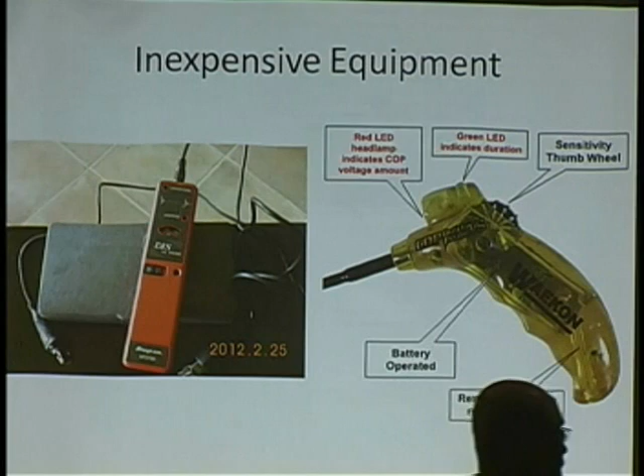Give me a reason why you should come out of that fuel delivery funnel. Once you, like, I start the car up on propane, all right, I drive it in, and there's no ignition issue in that, and there's no engine integrity issue in that, right? It's a fuel delivery problem. Why would I even think about looking at anything else? That's why I see a waste of time all the time. You've got to believe in yourself, is what it really comes down to. You've got to believe in your diagnostics.

All right, so we're going to walk through this now. The end result is that there's a lot of neat equipment out there. Has anybody seen this yet? This George, anybody's ever been George Mensah? George has been here a couple times. George and I do a lot of things together. George has designed a thing called a U-scope.

That is a problem cylinder, and the problem is external to the combustion chamber. Remember I said that.

Here's what we're going to get into. It's kind of weird that we have 3 seminars going today. While I was sitting in traffic on the New York freeway driving up here yesterday, with cars on fire and everything else, I was thinking about the 3 seminars. Does everybody realize how closely related they really are? What Jerry's going to do, what Judy's going to do, is talking about P0420s. And everything, P0420s come because of low catalyst efficiency. Well, everything I'm going to show you is all about how efficient the engine actually is.

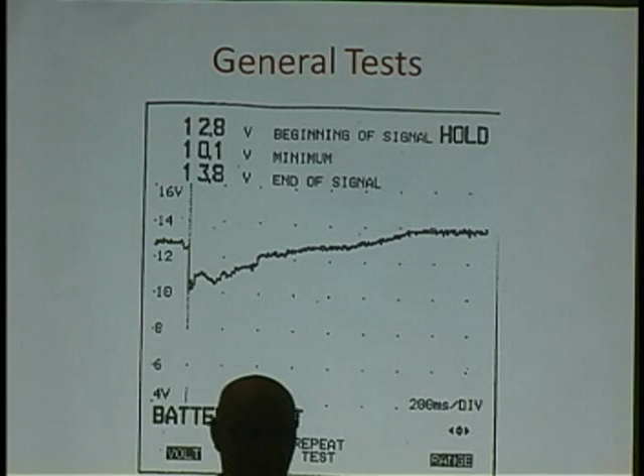Very simply, why do we have so many quote-unquote drivability problems now that I won't be talking about? It's because the federal government basically said get the car running better, get the car running better. And you ever hear that cliche, watch what you wish for? Well, what happens when the car runs better? CO2, carbon dioxide, right? So what do we have to do? We got a choice: either make the car run bad again, or turn the engine off. That's what Doc was talking about basically all morning. So these aren't really 3 separate things, they really are related to each other.

Anybody remember that picture there? Anybody ever have a thing called a Fluke 98? Here's another thing I just told you: when something is awesome, a lot of times we don't purchase it, and what happens, it goes away. I had a Fluke 97. Unless you did what I did every day and had a lab scope in my hand literally 8 hours a day, a Fluke 97 was pretty intimidating. With a nice scope it was still a little intimidating though. So if you don't know this, Corey Glassman from Fluke and George Mensah from AES got together and designed a thing called a Fluke 98.

And they made it a little more user-friendly. What you're looking at right now is a battery test. Geez, I thought this was a class on ignition patterns. Well, see, this is what it all comes back to. I'm sure nobody here ever did, but I lost my butt so many times by jumping right over the basics. And when I had 22 to 28 cars every day, I made sure that I have the basics. If my guy did not do this test, I would have been all over him.

You know how many times I flew? I became a troubleshooter for factories. I followed up behind the factory troubleshooters. You know how many times I flew across the United States and told somebody, you know what all those drivability problems are? You got a bad cell in a battery. So I always joke about this. I had some issues with my heart a couple of years ago, and I gave up my mobile diagnostic business and basically just do the seminars now. But the end result is, I said if I ever start my diagnostic business up again, I'm going to call it 'You Got to Be Effing Kidding Automotive,' because every time I told somebody what was wrong with a car, they said, you got to be effing kidding, no, a bad cell on a battery.

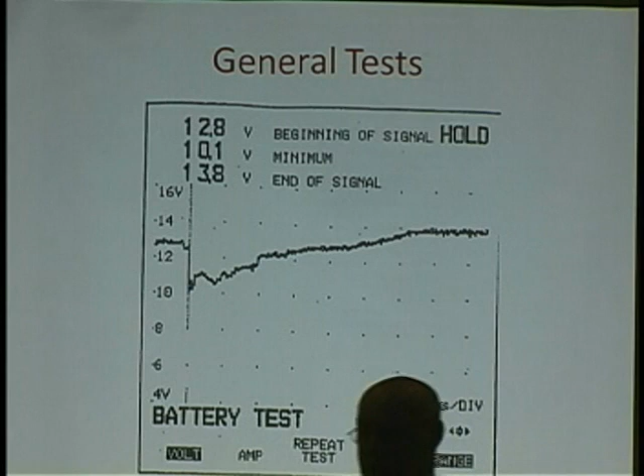Well, that's why I asked if anybody ever attended a McKenna seminar. McKenna told me all the time, if anybody ever walks in your shop and says when I put a VAT-40 on my car it starts to do this and that, they said, then use a VAT-40. But if they say when they're driving their car, when they start the car, why don't you use the things that are on that car? That was the number one thing he always taught me. He believed in equipment, but he also believed in use the car, use what's on that car.

But you're trying to find out what's happening to the battery voltage, so you crank it over and look what happens. This one went down to 10.1 volts. What it did is transfer that number right up there. Then when you crank the vehicle, this area right here is called CEMF, counter-electromotive force.

If I ask somebody to bring an engine here on a stand, and let's crank it over with a ratchet and socket. If you turn it over about 3 times, you do the first one, I'll do the second one. As you're coming around your third one, I'm going to grab the breaker bar and keep moving it. Don't I have an easier job than you? You had to get it going, right? That's CEMF. Every part of this waveform, if you look at it, it's telling you a story.

Can you say that acronym again? What is CEMF? Counter-electric motive force. And that happens a lot of times on a lot of things.

Okay, now hopefully somebody's sitting there thinking who cares, we can't buy this thing. I think it's pretty hysterical that a lot of the equipment I have, the same equipment you have, they tell you you can't do this with that, you can't do this with that. And then I said, thank God I had already been doing it - I would have known I couldn't do it, you know.

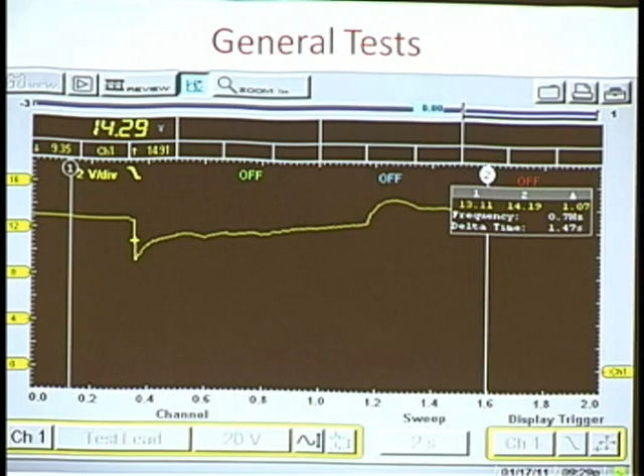I don't care what it is, but like that little thing George had, like $299 now. So my point is that you need to see the waveform and get used to what normal is. And then you're not going to be wasting any time. That's what it comes down to. Time's money.

Time's money. I hear people all the time, they tell you, you know what, boy, we fixed this vehicle, we fixed this vehicle. Okay, yeah - you start working on Monday, you finish on Thursday. That's called a hobby. It's not a business.

And everybody accuses me a lot of times of flat rating. They say I'm a flat rater. I'm not a flat rater. A flat rater is guessing. There's a way of doing intelligent, fast, accurate diagnostics, but you got to know what you're looking at. Does that all make sense?

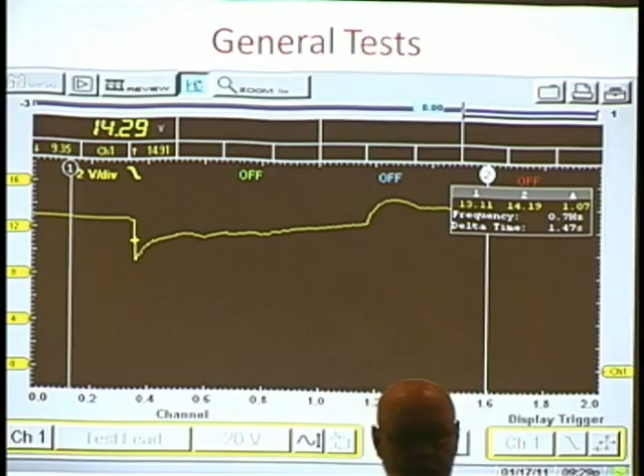So we're going to go through this now. Here's what I find all the time, I'd say just this week alone - from my experience, more than half of the drivability problems are not PCM or input sensor related. It's pretty funny. I don't know how long you've been in the business, but I started in my father's Flying A gas station working on Ford flathead V8s. I remember the first time a car came with valve covers, and I thought, wow, high tech valve covers. So I've been doing this a long, long, long time.

And what I found is very simply that we probably had no problems years ago, because if a car's got a computer in it, then the computer is always the problem, right? So we didn't have computers, so we must have never had any problems, right? Well, I think it's funny - we got computers on cars, and we had something to blame. One thing I stress in all my seminars is that computers can do things we can't, and we can do things a computer can't.

A computer - if I said, I want you to put a vacuum gauge on your engine and study that every second you're driving the car, I don't know about you, but I know I can't do that. But a computer can do that. But what a computer can't do is kick in common sense. Yeah, we have all these new things with adaptive memories and all that stuff, but the bottom line is that a computer has a program - it says, when you see this, do this. It didn't say, when you see this and it's a good signal. It just says, when you see this, do this.

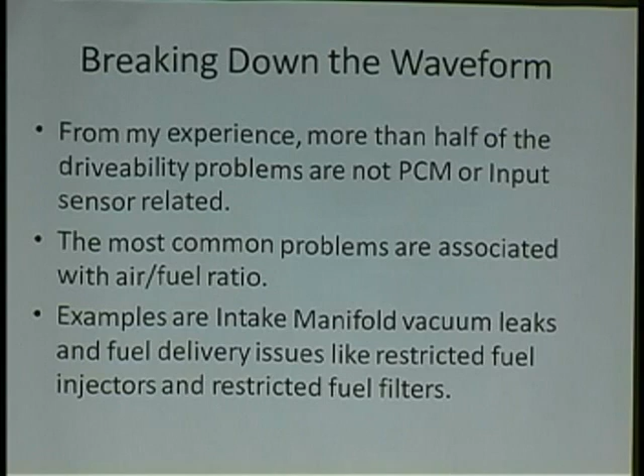Okay, the problem with these issues will affect other circuits like the ignition, which can cause partial or complete cylinder misfire. Unfortunately, we're led to believe ignition scopes are only good for finding open plug wires, fouled plugs, etc. I believe the root of the problem is that too much attention is given to firing KV and too little or no attention to the rest of the waveform.

I'd like to break down a waveform and give credit to the areas that help us actually understand a problem and its effect. Remember what I said - you really won't have to look at the waveform once I explain exactly what happens in there. I understand it's becoming increasingly difficult to get an ignition waveform due to the newer coil-on-plug systems.

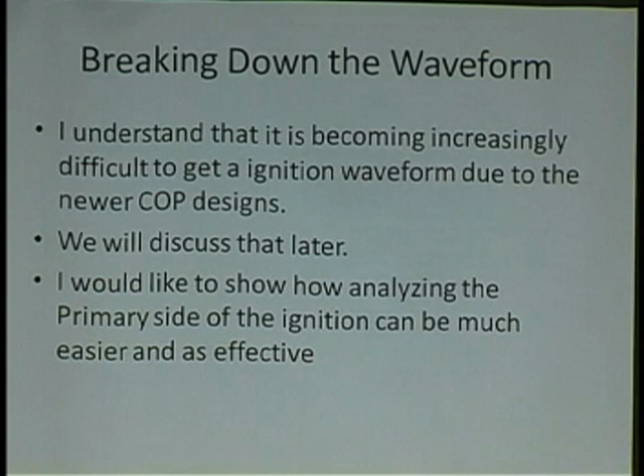We'll discuss that later. I like to show analyzing the primary side. All right, we get into this thing. I love this - you know, I say, look at this.

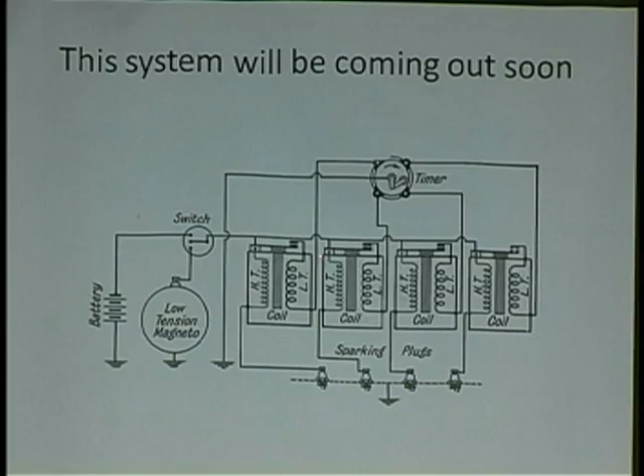I do a lot of work, a lot of consultant work for manufacturers. So next year, this is the system that's going to be coming out of a couple of manufacturers right here. What we have is something really weird: a primary and a secondary side of a coil. If you don't know the difference between the two, the one with fewer windings is the primary side, and then you have a secondary side.

Very simply, you've got battery voltage applied, and then a timer here that's going to time when you should fire it. And then we've got these new things called sparking plugs here. Very simply, it's going to be the newest, greatest thing out there, right? Well, that's actually a 1928 Model T.

So we can sit there and say how ignition systems are really, really different and stuff, but correct me if I'm wrong - did they really, really change?

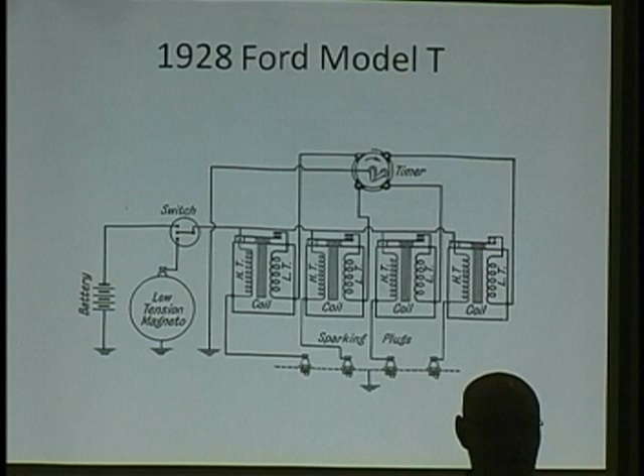If you don't know this, the ignition system you drove here on was actually designed in 1911. And I break them all down the same identical way. I don't know one out there that doesn't use primary, collapse the primary magnetic field, and produce secondary. When you break it down like that, I don't care what type of ignition system you have, they all basically do the same thing.

Now here's what I'm going to do. I'm going to break this thing down, and I'll tell you what I did here. We don't all have this stuff. I decided, like anything else I've ever done in my life, I always try to go for the hardest one. If I can explain the hardest one and get everybody to understand, it makes sense that the other one's going to be easier. So if you're wondering what I'm doing with this stupid thing here called D...

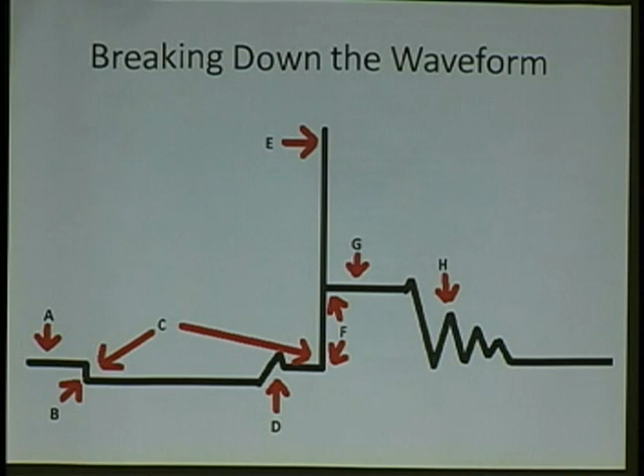Anybody remember current limiting, the HEI GMs and stuff? Well, if you don't know it, we still have that in a lot of cars today. But HEI GM really brought that to a head, though. So we're going to go over this, we're going to break it down section by section right here.

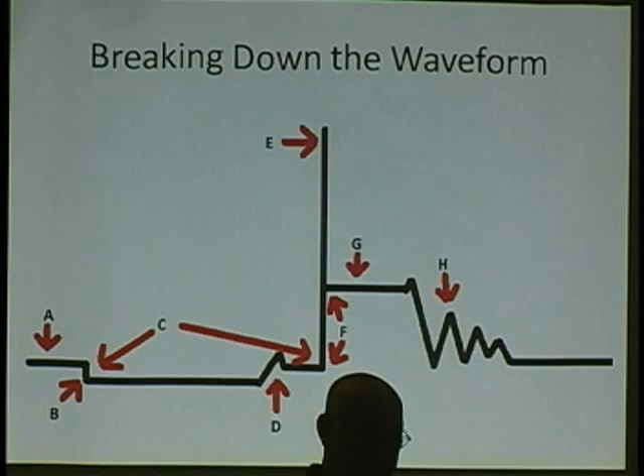First of all, here's my waveform. We're going to understand very simply that my dwell period begins right here. So 1.5 million years ago, my points would have closed there, and my points would open up here. When you drove here today, or yesterday, your module energized here, and your module de-energized here.

You know, it's pretty ironic, and I like to break things down to what they really are. We don't like voltage spikes on cars, right? We have clamping diodes and suppressing diodes all over the car. We don't like voltage spikes. This is the one voltage spike we want. That's really all it is. We're building a strong magnetic field, and we're collapsing it. When we collapse it, we have a spike.

Now remember what I'm going to tell you, it's very important for this part. The spark going across your spark plug does not light the air-fuel ratio, and everybody knows that already. You've all pulled plugs out soaked in wet fuel and had spark. It's the heat intensity of that spark that lights that air-fuel ratio. So we can have the spark.

So there's a real good test out there, I'm sure nobody here has ever done it, where you want to find out if a Phillips head screwdriver is a good conductor, right? Because that's the only reason I can think of for ever sticking a screwdriver in the end of a spark plug wire. I'm sure you're just trying to find out if the screwdriver is made out of good metal or something. Because that really tells you nothing other than something is happening on there, the engine's spinning. Other than that, if you're going to say, oh, my ignition system's okay...

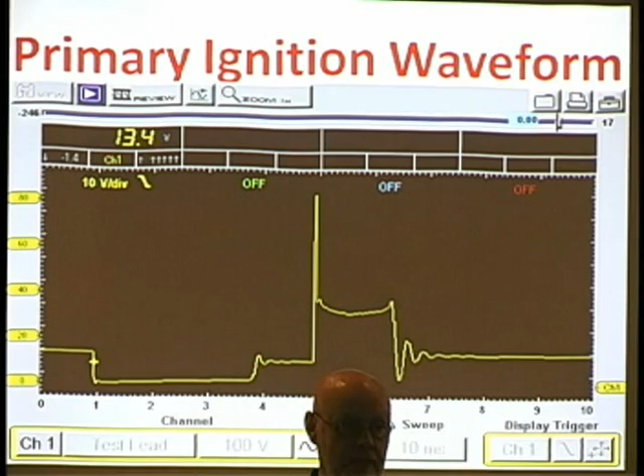So what I'm going to show you is that accurate. It can actually show you what cylinder and internal, external combustion chamber. There's a lot of things I've done in my life that work a lot of times, I'll say most of the times. This doesn't work most of the times - it has never failed me. Every time I've ever had to do this thing, I can always pinpoint internal, external combustion chamber, and obviously what cylinder it is.

So now what we're going to do is, I already ruined one myth, that we can't look at a vehicle, a COP coil. All right, there's a COP coil, and the end result is that you can look at it. Now I started off and talked about primary and secondary. There's the same cylinder right there, and I've got primary and secondary on top of each other.

I don't know about you, but I bet anything, if not right now, you will be able to pinpoint things, whether it be the primary or the secondary side. The neat part about it is, when you do see a problem with a primary, like I said, it's going to go into the secondary. Don't blame the secondary until you go look at it.

If I see a problem on my secondary side and I switch over to my primary and I see a beautiful primary, you know what? If it looks like a duck and walks like a duck, it's a duck - it's a secondary problem. But more than 50% of the time, I'm going to say more than 70% of the time, my secondary problems are in the primary.

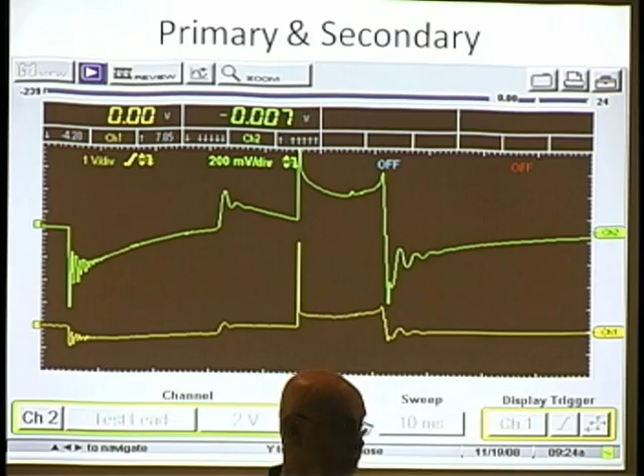And especially today, with voltage drops and all that stuff, Doc was talking about if you're comfortable with Ohm's law. I'll tell you right now, no offense, if you're not comfortable with Ohm's law, get comfortable with it. Because voltage drop testing, Ohm's law - when I started in the industry, we had a 6-volt battery, an AM radio, and a starter. That was the electronics part of the cars. Now, I had to keep on changing with the times and stay up on it. If you're not comfortable with Ohm's law, if you're not comfortable with voltage drop testing, get comfortable with it.

Now, that I talked about, me earning a living, I do not look at that yellow trace. There's no need whatsoever for me to look at that yellow trace.

What I actually have right here, and it's not just a coincidence, is a mini amp probe. I'm on the ground control of that coil right there with the mini amp probe. What a tough setup that is, two leads on your scope, and now you're actually seeing the work.

Now look what I did here purposely. Look at the top of the waveform, how it cuts off right there, okay? Look right here, what a coincidence, man. Right here, where this starts to go up, is even with that. And what is this down here? That's called current limited, which means you want to limit the amount of current because you're probably at low RPM right now, and you're probably going to burn your circuit up if you don't limit it.

What would happen when you take this car and increase your RPM? Picture this: take both ends of that line and pull it. What will happen is the hump will come out, because you don't want to limit the current anymore.

I don't know if it's the same in New York, but in Philadelphia there's 360 degrees in a circle at 1,000 RPM, and there's 360 degrees in a circle at 5,000 RPM. So you have to make and break the primary, right? And you have to build that strong magnetic field. That's why they put a lot of current in it, and I'll show you how they do that. But when you're at low RPM, you've got to be able to limit it.

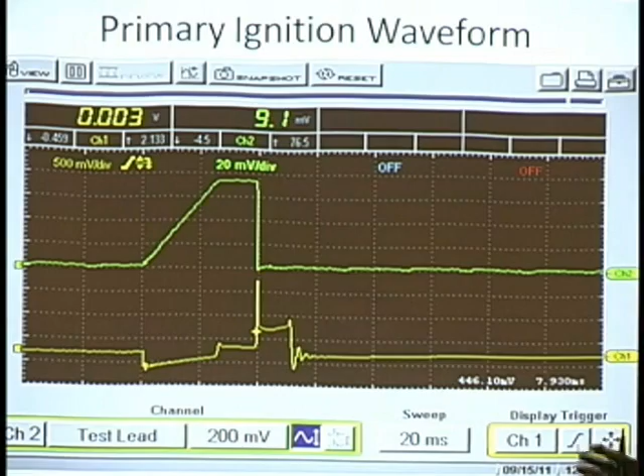That's what it comes down to. All right, now here's that U-scope again. Why would this system have both methods?

I'll tell you what's going to happen. That'll be your M3s, your M3 BMWs, and performance vehicles. They muck around with a lot of them. A high performance vehicle, they're still 360 degrees in a circle, so they have to do some stuff, and I'll talk about how they actually do that. For the most part, you're going to get one or the other, but every once in a while, if you go to look at a car, your luck and my luck, you're going to get one that has a combination of things.

I really don't care, as long as I understand it though. It's all about control, is what it's about. Now here's a perfect example I said to you. I'm on a $299 scope, all right, and you put an amp probe on it, or you can go voltage.

Now remember what I said also, look at that waveform. Look at the waveform here. See how it jumped out early right there? I guarantee you, by the time I'm done, you're going to realize what's going on there. I got a higher firing KV, and I also got a higher spark KV. Spark KV is extremely important, and that's where I'm going to lead this into. That's the part that nobody ever talked about.

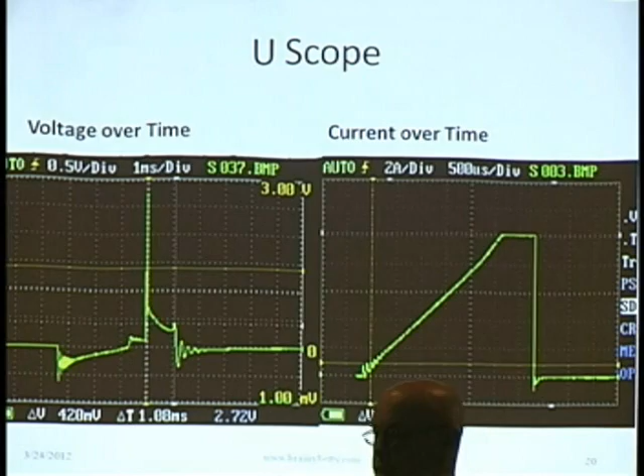Remember I told you when that guy was getting off the stage, and I was getting on the stage, that guy said two things up there. He said spark KV and imaginary line down the burn time. And nobody has ever taught about that before except McKenna. I've had people attend seminars, and they said, my God, it's so much easier now. It's like nobody ever really looked at it, no one ever talked about it. It's there, and it's pretty simple to see, right?

So the end result is, here's a couple of things I'm going to go over first. I talked about putting a puzzle together. And Doc was even talking about, is the problem really there, or is it because of something else? Hopefully everybody in this room realizes that the computer doesn't take a guess of when to operate the fuel injectors. It doesn't guess. It knows when it's got to do it, okay?

If you don't know, there's something called syncing. And what you're looking at on the screen right now is a V6 engine. It's a 3800 General Motors engine. I call this, because I'm not going to listen to everybody's names, since I work on all kinds of cars like most of you do, the alarm clock. The alarm clock is very simple.

Go out in the parking lot right now. Your computer isn't doing anything. It's not controlling anything. Why? Because there's no signal being sent into it. It's kind of like Doc was saying, you got to make sure the thing's getting a signal first.

So if you drive the alarm clock in, which in this case is the crank sensor on this V6 engine, if you take notice, I'm on one injector also. If you count there, you can see every sixth one of these, that same injector works again. It's not magic, right? Bottom line is almost every manufacturer is either going to use the rising edge or the falling edge of the waveform, and it's going to sync it.

Why is that really important? You know how many times you've had a car already and all of a sudden it just stumbles and stuff? Remember what I said: a computer can only do what it's told to do. So if the computer was told to hit that injector on a rising edge, what do you think would happen if that waveform dropped out for a second and came back again? That'd be another rising edge, wouldn't it?

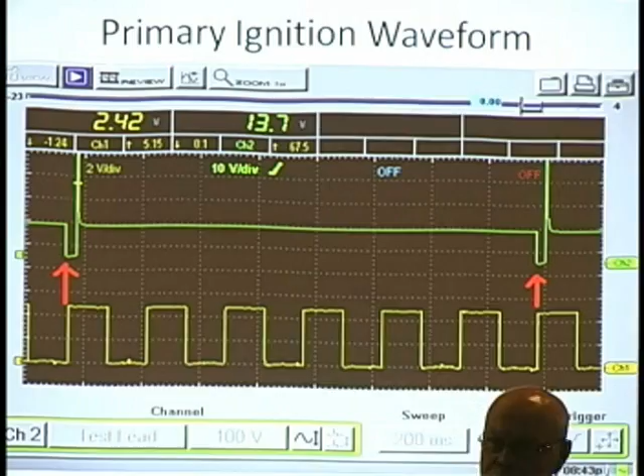Make sense? And then all of a sudden, look what I'm looking at. You're hitting the ignition, and it's going into 3 other circuits, actually. So what I want to do is, and this is the perfect way, we're going to stop for lunch.

I want everybody, if you get nothing else, I want to teach you this. There's not a car that you people have right now in a parking lot that we can't apply this to. I need to do some tests and drive down the funnel, okay? What I'm going to tell you right now is a perfect example that there's not a car that you drove here that this won't work on.

I'll use my own truck right now as an example. I have a COP ignition, a 6-cylinder with COP ignition. So I happen to have one A - A is where the primary receives its power from - but I have 6 B's, because my modules are inside a PCM, and I'm individually making a break in the path to ground. So I have 6 B's. I also have 6 C's because that's where the secondary begins at the end of each COP.

Now, if you have a vehicle like I'm going to show you in a minute, like ASE Composite Vehicle 1, which was a 4-cylinder distributor vehicle, then that's completely different. But the bottom line is A, B, C, D. And if you think about it, why did McKenna lay this out like this? Because why wouldn't you go and check A first?

Now, I'm not going to say you're always going to do that - it might be hard to do. But if I go and take my Phillips head screwdriver trick and I get nothing, well, I've got to go backwards at that point. So if you don't have A in the ignition system, you have no chance at all at B, C, and D, right?

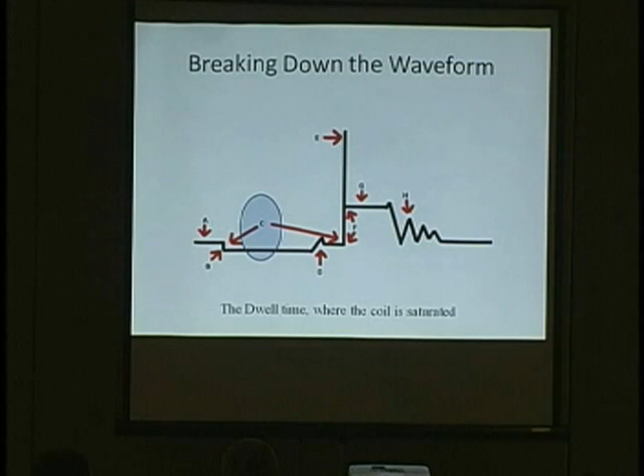Now, this is where we got to understand - I decided to put the one with the current limit in there. They might not have that. There might be a straight line, or it might be the current limit. But bottom line is, you're going to have one of those two, and I don't care which - when it pulls down, you want that to stay down.

When you have a current limit, it's going to be a very, very discrete-looking signal pulling up on an angle like that, right? It's not going to have noise in it - it's a discrete signal. But the dead giveaway, and I encourage everybody since it's actually easier to do, is you use something like that mini-amp probe, and you go around with it. Precisely when you see that current limiting on a mini-amp probe, you're going to see the current also hit that level at that point.

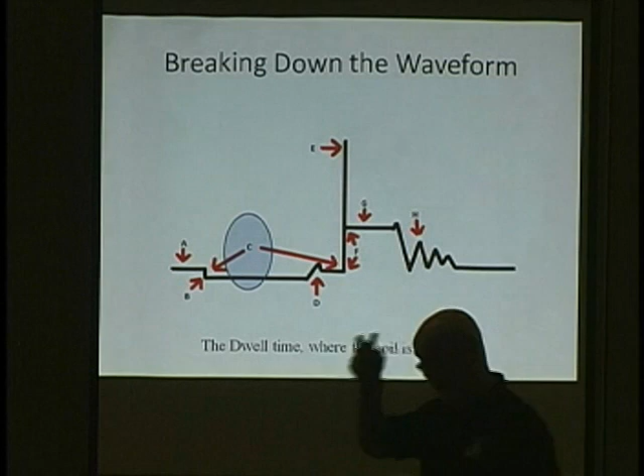A couple of people mentioned, just to clarify this for you - a lot of people say, well, I never heard of PDI and stuff. Let me tell you, PDI has been making mini-amp probes and amp probes longer than anybody I know other than Fluke, but they've been making them for every other company. So everybody has seen PDI equipment - guaranteed, you've all seen PDI equipment, just had somebody else's name on it. So the bottom line is PDI made a decision to start producing their own.

I have a $500 mini-amp probe, and if I put it up against a cheaper one and showed you two waveforms and asked which is better, I'll guarantee one will look better than my $500 probe. So why am I so stupid to buy the $500 one? Because when I started doing this, there was only one probe out there, I didn't have a choice. It's a really good probe and easy to hook up.

One other thing, so I don't have to answer everybody's question individually: that probe has banana jack ends, and there's another version with BNC ends. Don't get the BNC one, get the banana jack one. That way you can get a BNC-to-banana-jack adapter and use it on any piece of equipment. If you buy the BNC one, you're stuck with BNC - you can't adapt it the other way. You really don't want to go that direction. Go with the banana jack ends and convert over to BNC when needed.

Point D is the dwell limiter? Point C is the dwell, taken from the point. Here's another important thing: sometimes that's going to change, and sometimes it's not going to change.

Remember when I told you about the current, and showed you that straight line going up? If you get that, you're usually going to get a varying dwell. If you get a straight point coming down, that means you've got a ballast, and that won't change - the degrees will be the same all the time. The difference is that by increasing or decreasing voltage, you increase and decrease current at that point too.

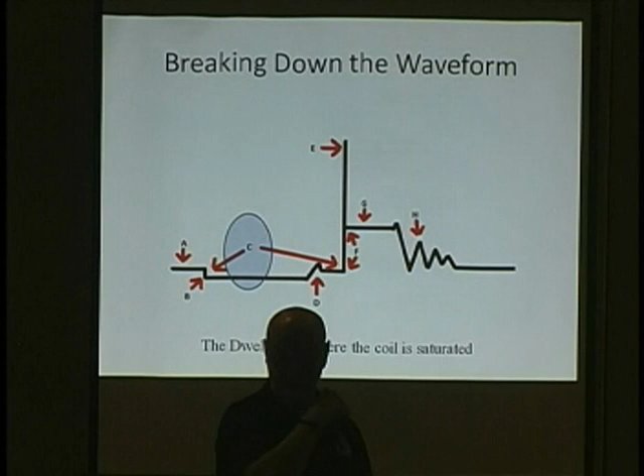As we get further into this, I'm going to start showing you what happens when you see a bad one, and we'll look at that. Okay, here's a perfect example.

There's current over time of a coil. If I take a line straight up here, this line and this line are eventually going to meet. I'll guarantee where they'll meet - at about 14 amps, because I've got about 1 ohm resistance and 14.7 volts, and that's Ohm's law. On this particular scope, I'm set up at 100 millivolts per amp, and I'm up to 200 millivolts per division. So there's 1, 2, 3, 4, and almost up to 5.

Some imported vehicles will run as high as about 9 amps, so I'm running about 9 amps right here. But I've got 1 ohm resistance - actually this one is 0.8 ohms resistance and 14.7 volts. That's why it goes so much higher. If you continue with that, that's what it will look like. You have to know the rest of the story, because very simply, they have to build it up fast, so they design it this way.

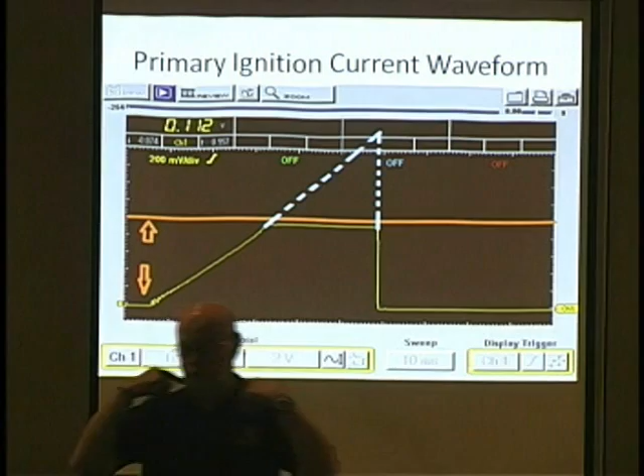Now, I'm sure everybody here, or somebody you know, has read a high-performance magazine saying here's what you've got to do - you want more power, get a high-performance ignition system. Besides the fact that they paint it yellow, blue, or pink, and tell you it comes with a neck brace bonus if you call within 3 minutes because it's got so much power - well, it's very cool, and you need to understand this.

What they actually do is, if you've got 1 ohm resistance in the primary side of the coil, they bring that down to like 0.7 ohms resistance. At 0.7 ohms resistance, everybody should be able to figure out what's going to happen - the angle of the ramp is going to move this way.

Because it's going to go up much faster - if you put 0.7 ohms resistance, instead of 14 amps, you're going to get to 17, 18, 19 amps at that point. So what happens is you get to the same current you need, that same 5 or 6 amps again, but you're going to get it much faster. That's quote-unquote performance.

I don't want to make this a performance class, but the reason why I point that out - 3 guesses what happens when you start getting voltage drop in a circuit, when you don't get the right amount of voltage. Remember I said current follows voltage. So now all of a sudden you're going to take notice the angle of the ramp's going to go this way. So now I'm still going to get there and say, no, you're wrong, because I measured the current here with my amp meter, and I'm still getting the same amount of current.

Well, you might be getting the same amount of current, but what would happen if this current here went up to right about here? How long do you have it? That's a weak current. And that's the vehicle - when you get into a demand situation, you see it fall on its face.

Now a lot of people say, well, how do we know which is which? Like everything else almost you ever do with a scope, comparison read it. So what do I have right now? I got 1 coil operating, okay?

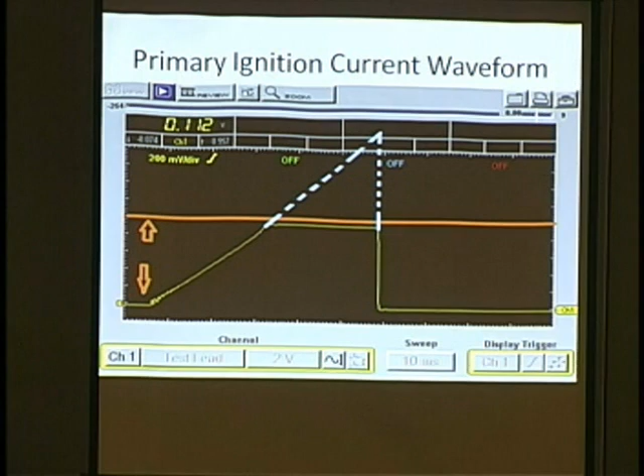But the neat part about current is it's on the power and the ground side. So when you go to the power feed of a coil pack, or the power feed of 6 COPs, you can see all of them. All you got to do is change your time base and put them on, and they get just like an old parade pattern - you got them all lined up. Now you're doing a perfect comparison read.

I'll tell you, it's not anywhere near as difficult as people think. You just got to get started looking at good ones, that's all.

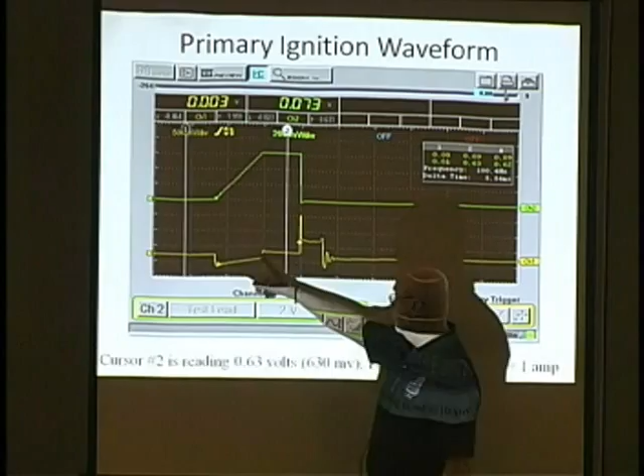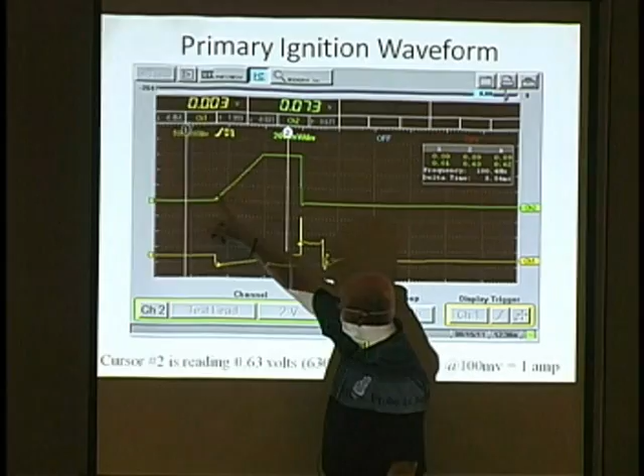Now, if I were to hit the throttle on this vehicle, what's going to happen is the dwell is going to increase, right? And what's going to happen here is that this angle is going to come over toward here. I'm going to lose the current limiter. The further this goes, this is going to move over also, and then it's all going to move together.

So the reason why is that's about 6 degrees at idle of dwell right there. You go to get about 20 degrees of dwell at 2,000 RPM. When you start raising the RPM, you still have the same amount of degrees to do the job in. So now you don't want to limit current anymore.

Now, little thing to throw in, you might want to put this down. It's a very common thing I see all the time - when you buy, and I'm sure there's some quality, quote-unquote, white box stuff out there - almost every time I look at a vehicle that was bad, didn't run, and the guy puts a new module in, now it runs, but it just doesn't seem to have the same amount of power. I can't begin to tell you how many times I find a white box module has a fixed dwell on it.

So these GM ones, for instance, they were 6 degrees of dwell at idle, and up to 20 degrees dwell at 2,000 RPM. After that, they didn't extend anymore. I can't begin to tell you how many Corvettes and stuff I looked at with 13 degrees dwell no matter what. And what it was, it ran - it didn't run before, it runs now, but it's not going to run with the same quality.

So you want to get used to checking, is this a dwell that varies, or do I have a fixed dwell in it? And you'll find that's how they save money - that's the most expensive part of that module to build in. So they can get the car to run, but now we're sitting there trying to, I like to say, pull your hair out, but I don't do that.

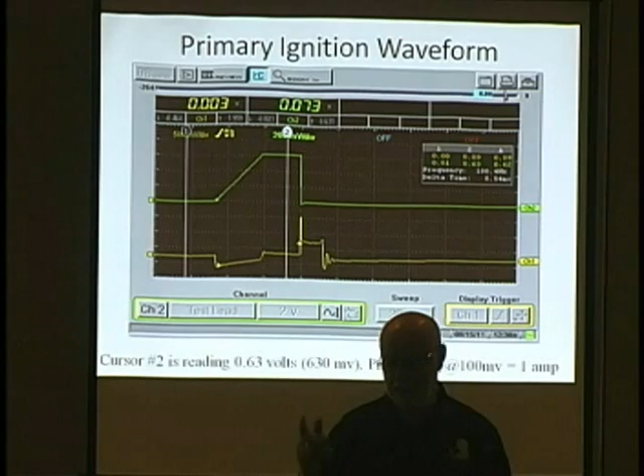The end result is you're saying, why isn't it run like it's supposed to? Now what I'm doing is I'm moving this, I want to show you time-wise. You can see how they line up perfect, right? Look right here, and look where it starts, and look where it starts there. I like to bring cursors up just for that reason. It's not me showing you, it's happening right there also, that you were just talking about a few seconds ago.

How did you correct that problem? With that 13 degrees and stuff, a quality module. Yeah, there's nothing I can do about that. Or, you know what I do? I've done it, I'm going to tell you more than not. At least I told the shop or the owner of the vehicle, here's what it is, and you make the decision. You want to leave your $35 module in there, you want to put a $95 module in there. The car's still going to run, but the reason why it doesn't have the power, I've given the answer.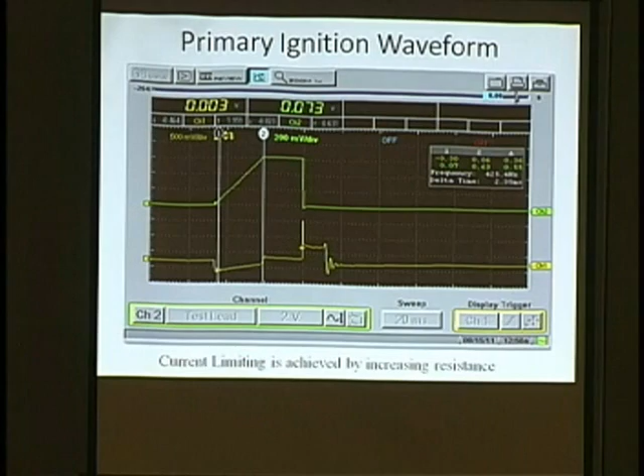I'll tell you right now, a lot of cars, 20-25% of the cars that I pinpoint the problem, it doesn't get fixed. They at least know what it is now. So I'm very, very careful about this whole thing I'm doing. I can't say I think maybe perhaps it's here, this is it - I have to be able to know what good is in order to say that though. Most of the time it's like generic versus OEM, right? Yeah, and it's not all - somebody's aftermarket stuff is just as good, if not better. But when there's a reason that something is $95 and something's $30, it's not that the printing on the box costs $65.

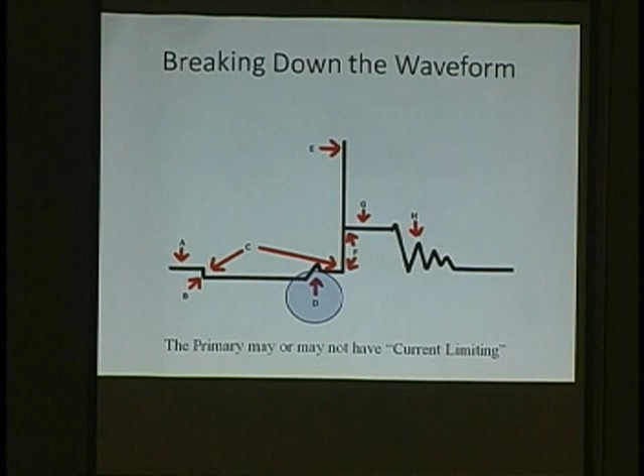So here's what I talk about, current limiting. A lot of people think that went away with the GM HEI. It didn't go away - a lot of cars are current limited. And how they show it to you in the waveform is what you want to get used to.

Okay, so here we go now. My one piece of rope - this is what I really want to accomplish this afternoon. Everybody talks about the firing kV and the burn time. I talked about it first thing, that one piece of rope, all right? If it's harder to fire the cylinder, your firing kV is going to increase, okay?

What I do all the time with my students - they love to see me do this because they're hoping I'm going to have a heart attack and fall over. I've got a tile floor in my classroom, and I say, guys, here's what I'm going to do. I'm 150 years old, but I'm going to see if I can broad jump 2 tiles. And the end result is they go, yeah, go for it Miss Morton, I hope you fall over, we get the rest of the day off. Well, I could probably still do it - I don't do it, but I can probably still do that, right? And I say, okay, what do you think, how about 5?

5 times, you got to die. I say to them, seriously, and I say to you, if I was able to broad jump 2 tiles, if I've got a ghost of a chance whatsoever of jumping 5 tiles, what do you think I'm going to have to do? I'm going to go take a run and start, right? I'm going to back up, okay? And if I happen to make that, how about 12? I'd probably have to go back to Route 84 or something, take a run and start. Maybe I'll go to the top of that mountain up there and come running down - I have to take a bigger run and start.

That's why I really don't like to do what I have on the board right now. What I like to do all the time when I talk about this, I want you to see me drawing it. You know why? Because I'm going to put a line up and a line down. So anytime the ignition system feels that it's going to be hard to jump the gap of the spark plug, this is G right here, this is the burn time. If it feels it needs a lot more energy to do that, what it's going to do is take a run and start. That's why it's important you understand that's not one line - that's a line up and a line down.

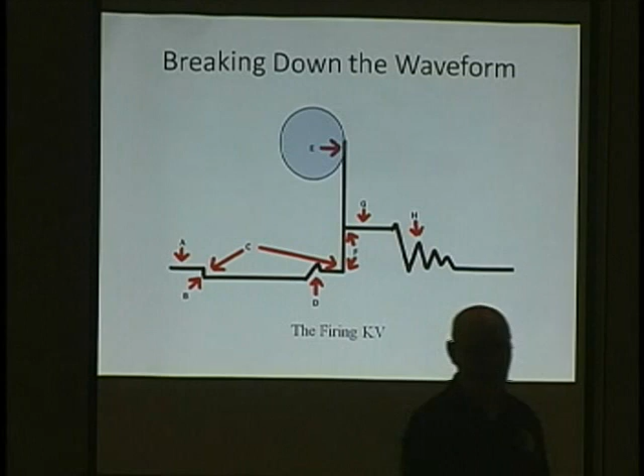But if I add the oxygen, you wouldn't stick your finger in that flame. So what happens when I make this flame leaner and leaner? Now I can start cutting the legs off the chair, right? Transfer that information you already have in your head into the combustion chamber now. Make sense? People always think when it's rich, that's really hot - no, it's not. Go put your torch on acetylene only and try to cut a leg on your chair - you'll be there until the next big event, maybe get a bubble of paint. Lean causes heat. So that's what's happening in these combustion chambers now.

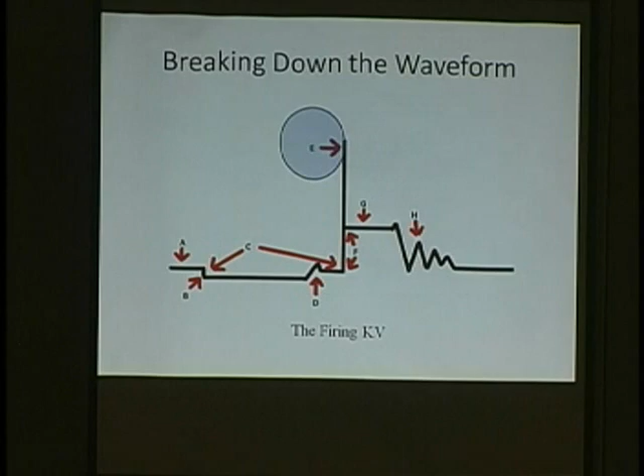Here's that rope. And by the way, you'll see this in a lot of books - this is McKenna. McKenna's the one who started this stuff. He talks about it - I swear he could walk around on Sunday afternoon coming out of church and he had this piece of rope on him at all times, always telling people about this stuff.

Remember this: don't worry about the firing KV, worry about the burn time. One more time, it's very important - 1.0 to 1.5 milliseconds. The newer the car, 1.0 to 1.2, because you know the firing KV is going to go higher now since it's running leaner. You don't want more than 1.5 and you don't want under 1.0.

All right, now let's get into the meat of this thing. That one piece of rope I just showed, see the 2 circles I have there? There it is right there. And I'll tell you what I don't like, even though I just did it myself - you saw my waveform, how beautiful that looked? Everybody says the same thing, and I'm going to say it also: you want to really study details in a waveform, you want to see nice 90-degree turns and all that stuff. No, you don't really want to. See this right here at the end? This is the end of the rope, here's the part of the rope.

See how that goes up right there? I can't tell you how many thousands of hours I've seen wasted with people going, 'what's that about? What's that about?' Everything I'm going to show you now, remember this: voltage over time. From bottom to top is voltage, and left to right is time. That's important because if I've got a hump right there, I said a leaner fuel ratio is harder to fire - you need higher voltage, right? Isn't most of the fuel, hopefully, burnt by the time you get to the end?

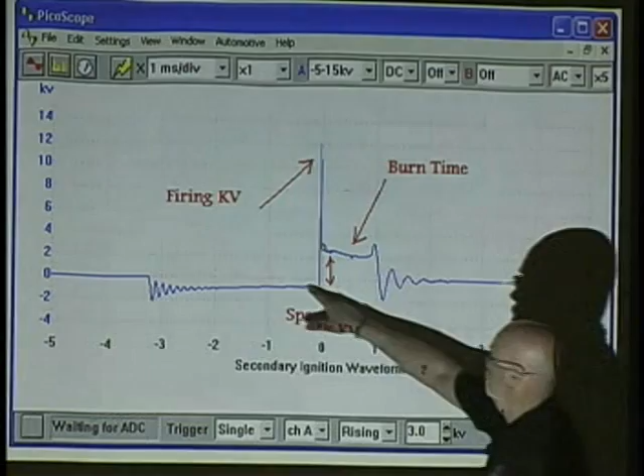We used to use an old test that we could measure that. There's the ionization voltage, but then there's the actual sustained voltage. It's usually, and everybody describes it different, that's why I asked that. Almost everybody describes it differently, but honestly I don't even care about description. It's such a powerful thing, it's unbelievable. The Spark KV is the amount of voltage between the very bottom right here, and where it jumps out at.

And you know darn well, everybody in this room, the amount of times you've heard anything about that, you could put in a thimble. This is the single biggest thing I get feedback from people who attend the seminar about. They have no idea how powerful that was. I've got literally thousands of emails saying, my God man, I'm cutting my time way down on this now. And I think that's kind of funny because it's not really that new. But it's something that now I realize I had the privilege of studying under somebody who really knew what he was talking about, and he showed me something.

Now everybody remember, as I go through this, no matter what the reason is, firing kV is going to go up because it's harder to fire the cylinder, okay? But the spark kV, that's the one you're going to learn to really, really watch. If the spark kV changes or doesn't change, that's a dead giveaway of where the problem is actually at - what that voltage actually is for the ignition system, what it needs to maintain that burn across the plug. If it turns out that the firing kV goes so high, it builds up energy so high, it has the ability, enough strength at that point to jump out early, if it's high resistance external combustion chamber.

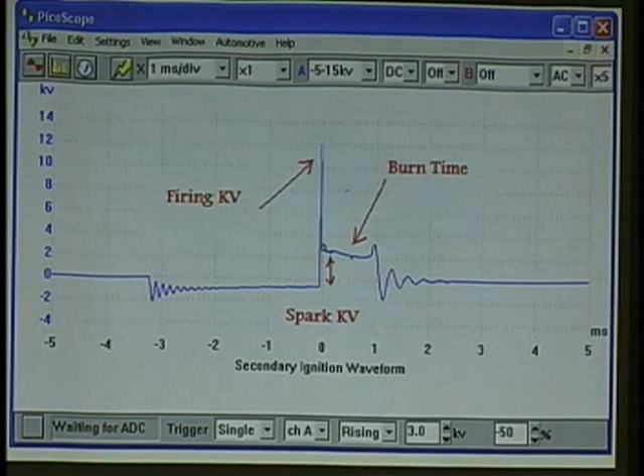Now watch. First of all, I like to tell you, again, I said this earlier and I'll say it one more time - I'm cheap. I must be, because I don't throw things out.

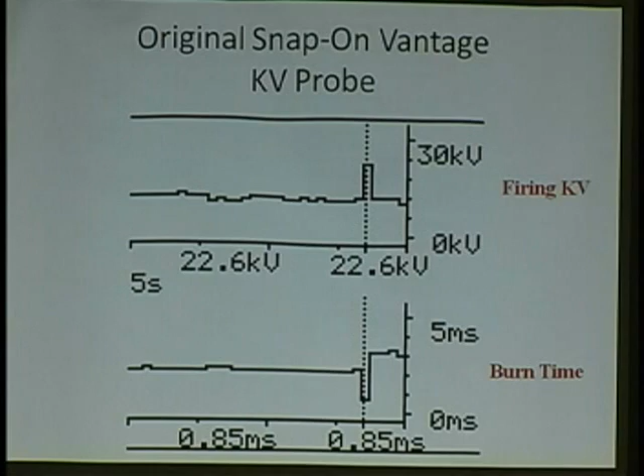Here's something you got to think about. Anybody give me a waste spark? Waste spark is going to fire once on compression, the other one on exhaust, right? You've been talking about it a little at lunch. What's normal firing voltage, what's the firing kV when it's on the exhaust? Any idea? Lower kV, okay, but how much? What's low? 10? 1,000? Maybe 12.

Everybody listen very carefully, this is cool and it's going to help you with a lot of different things. There's a thing called law of ionization. I didn't make it up, it was here before we got here. Look at this very carefully: it takes approximately 80 volts to push energy through 1,000th of a gap at sea level.

What's a plug gap usually gapped at? 40, right? 80 times 40 is 3,200. So it takes about 3,000 volts to fire an empty hole. You know how many times I've seen ignition systems using 6,000, 7,000 volts to fire the waste spark?

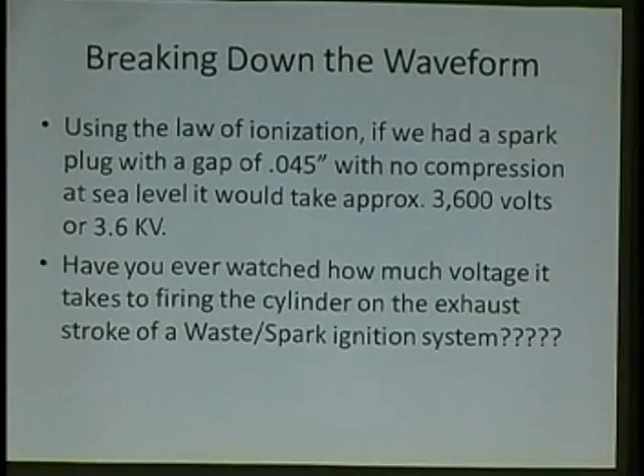You got to know what it's from, though. So very simple: if you take a 45 thousandths gap, and it's not under compression, and work at that law of ionization, that comes out to 3,600 volts. You don't want to see 5,000 or 6,000 when you're on exhaust stroke. So now you can see how you're getting that 12 or 20 kV because you're under compression at that point.

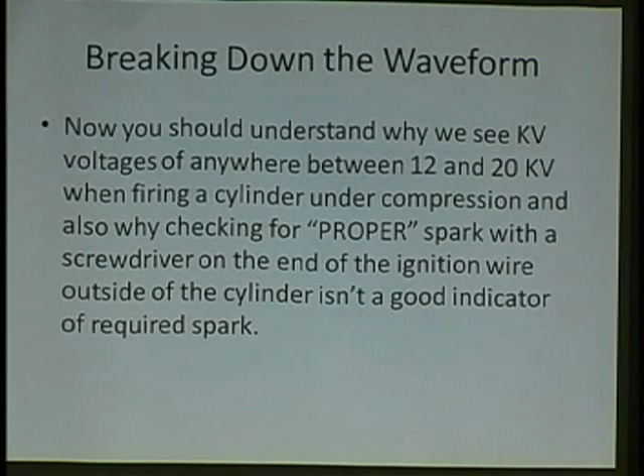Again, I don't worry about the firing kV, I worry about that burn time though. Okay, here's a perfect example, another piece of equipment. It's in the back of everybody's shop, facing the wall. It holds at least 5 coffee cups, and no one ever uses it because it's an old piece of junk. That's a Snap-on counselor.

If anybody in this room was taught secondary analyzing, I'm positive whoever taught you taught you a thing called a raster display pattern, or a parade pattern. They taught you one of them. Hardly anybody ever really learns both. We want to learn both because one is fantastic to look at for voltage things, and one's fantastic for time things.

This is one of my students' vehicles, his mom's vehicle. He's got a burn exhaust valve, and the valve is actually in a couple of training magazines now - there's a picture of it because it looks like someone took a torch and cut part of the seat right out of the thing. Very simply, I said to my students, look what we got going there. We did a cylinder leak down test - you can see the problem, air coming out the exhaust and everything else.

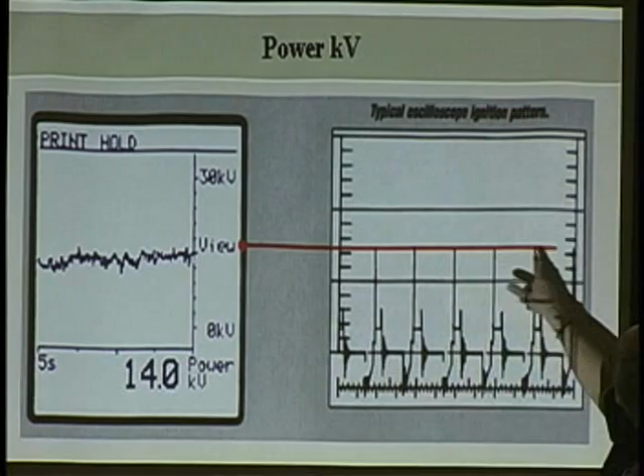See this line here? It's basically like if I say to somebody, draw a dot here, a dot here, a dot there, and connect the dots. That's what you have there. So when Snap-on guys go out and say, oh, you're going to see a secondary pattern here, and they look and get that line, they say no, it's not a secondary pattern. But look at it, it's pretty darn good for a fast, easy hookup. If I saw that thing and it looked like an O2 sensor, we'd have a major problem, right?

It's okay to get that kind of noise in it. Overall, they're basically okay. You know what I would now know about this particular vehicle? Whatever problem I have, it's not ignition. Now I'm going to take another one.

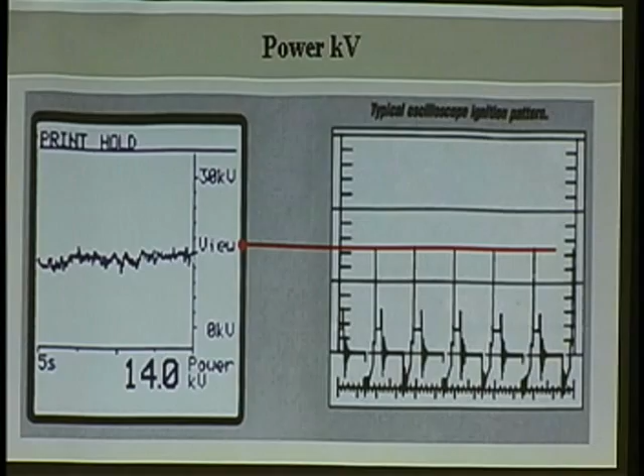I'm going to look at the other ones also, and you can look at the burn, the burn KV, or burn time, and spark KV. Now look here, I'm on a secondary pattern here, basically the same thing I just showed. What I'm doing is showing an actual one here, and again, I'm on a primary.

I love everybody, but you can't look at primary and get a good reading. Thank God I was doing it for a long time before somebody told me I couldn't do that. I mean look at it, that's a beautiful reading. What I now know about this particular car, whatever it is, here's my dwell, here's my

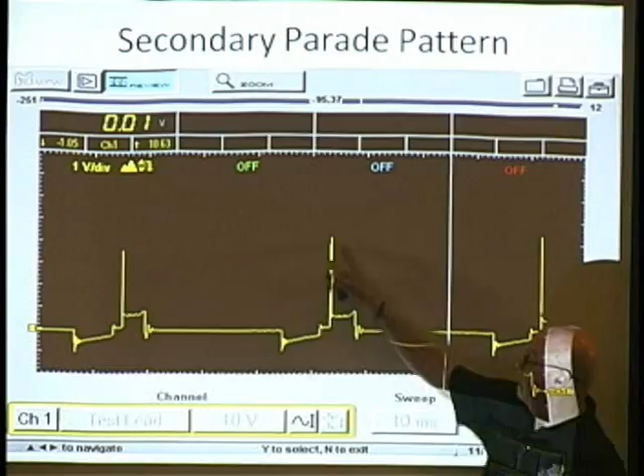module energizing, here's my current ramping, here's my firing KV, here's my burn time. I'm slanted up a little bit right here.

I never got this. What is this here? Wait, what's that for? It's leftover energy being dissipated back in. Leftover energy? What, the thing? Ah man, look at that. The ignition system is stupid, man. It built more than needed. Isn't that dumb?

Please, please, please everybody, listen to me. This is something hard, anybody knows anything about this, I'm telling you, start looking at this. This is very, very, very important. That's called condenser co-oscillation. First of all, it should be called capacitor co-oscillation today, but it's called condenser co-oscillation.

If I put a potato in a microwave for 10 minutes, and I take it out and throw it back there to Pete, and Pete's going, oh man it's hot, he's going to throw it back at me. And I'm going to throw it back at Pete. I don't want to hold on to it, he doesn't want to hold on to it, so we're going to go back and forth. Is it going to get hotter? It's going to get cooler, isn't it?

Okay, here's the deal. Years ago, they used to build about 3,000 volts extra on every firing. So if the ignition system felt it needed 12,000 volts to fire, it would build 15. If it thought it needed 15, it built 18. It builds about 3,000 volts left over.

Not because it's stupid. What happens is, when the dwell completes, it starts to build. And it doesn't know that you might be pulling up behind somebody, going a little bit slower, and maybe you might want to pass that person. And when I do this, pass somebody, am I going to go lean or rich?

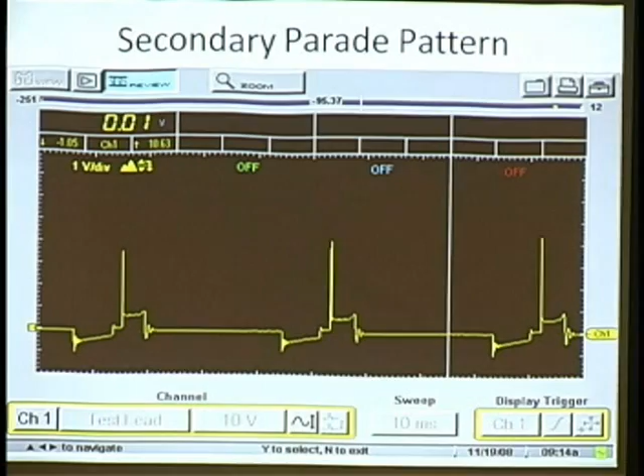And this is a perfect example of that combination. So you're looking here trying to get the whole waveform and figure out the waveform itself, okay? So here's that spark KV - this is that cheap piece of equipment a lot of you already have, and look what it had on it already: 5 kV, and this one here is about 1.5 K. So what I told you is that reading between the low line going up and the 90-degree turn, that's spark KV, right? Watch what happens here.

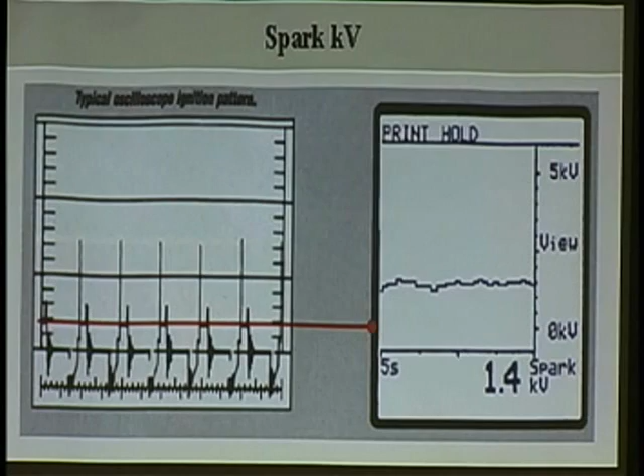Now I'm going to show you what happens - that's good. Now look what happens when a problem pops up, all right? Look at all my babbling so far today. That's second from the top cylinder. Which one do you think's got the highest firing kV? That one, right? Because look at the burn time. Okay, so what did I do there?

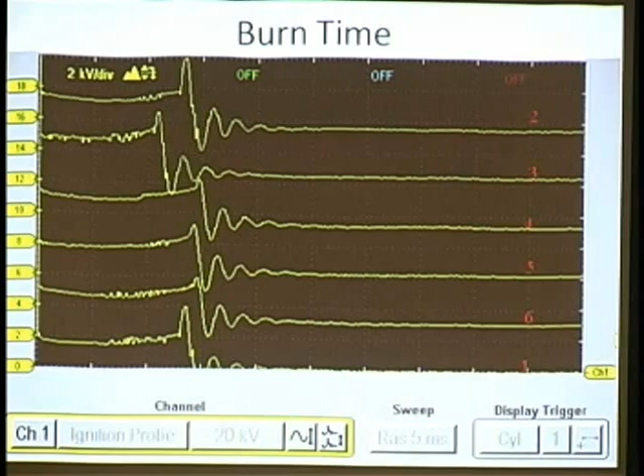Well, very simple what I did - I increased the spark plug gap by 20 thousandths on that plug. What I'm trying to do is back up what I'm telling you. Here's what happens: so if I didn't do it, and you got a worn plug, or anything else under the circumstance, it's going to do the same thing.

Now here's the most powerful part. This is the thing the guy said when he was getting off the stage and I was walking on - he talked about an imaginary line down the middle of the burn time. I want everybody to do this. Now here's a perfect example.

That unit I talked about on an MT2400, you know, you get good, and like you said, 'oh, is it this or is that?' I'm gonna get some good ideas. But I can see the actual waveform, even on the primary. Put an imaginary line down the center of the burn time.

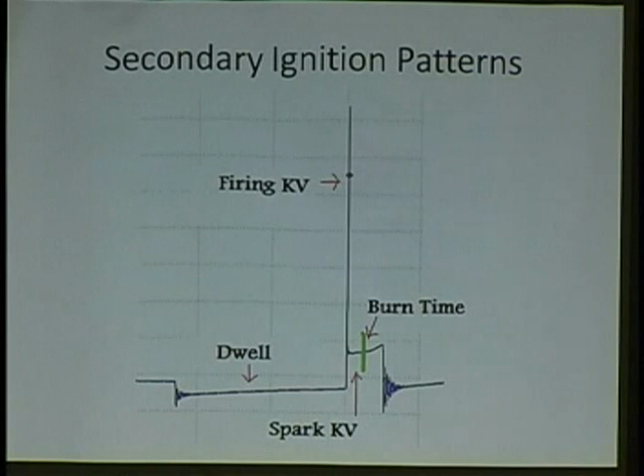Now listen - anything to the left is external to the combustion chamber. When I say anything other than good, it's external to the combustion chamber. Anything to the right is internal combustion chamber. All right, watch what happens now.

I'm going to start - look at my one over here, okay? Here's my 12 right here, and here's my firing kV. See how that thing jumped out right there? Okay, I'm positive that's external combustion chamber.

You know why? I did it. When you get a fuel filter, you get little plastic caps on the end so you keep the dirt out while it's in storage. I took one of those caps off the fuel filter, and I took the secondary spark plug wire off, and I put that cap on it and put the spark plug wire back. I caused external resistance - that's what jumped out earlier, right there.

Take notice of the second half - put the imaginary line down there. Look at the second half - the second half is straightening itself out.

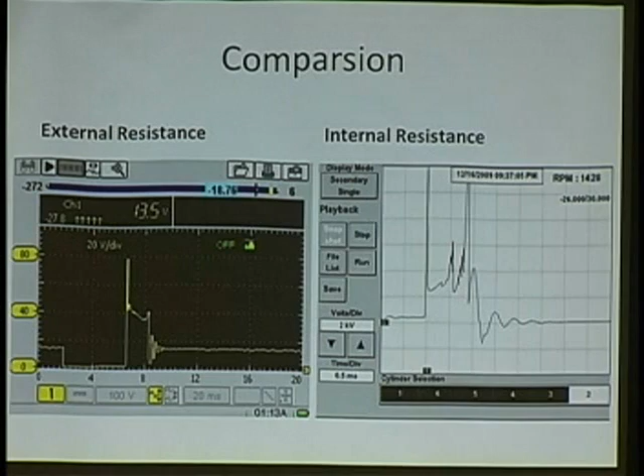Okay, now watch how this, we're going to go to an actual situation. You people are going to do a diagnostics. And we see how simple it is, and I'm going to guarantee you it's going to work that easy also in your shop. Here's your imaginary line.

What I did here, I did my fake one. I made it jump out, external resistance. I did dramatic here. What I did, I unplugged the secondary ignition wire. Remember what I did before on the other one? You saw the line go up and line go down. Well, now you can tell, not only do I have the same thing, my firing kV is high, my burn time is shortened, but my spark kV changed, which you couldn't see before. I'm positive it's external combustion chamber now.

Now that's dramatic, and I'll show you what I mean by that. We're going to go a little easier than that. So the old point distributor cap when the rotors used to burn away, all the things we used to see, the old cap and rotors burning up, it's all external combustion chamber. But I'm telling you now, I'm only 29, but about 45 years I've been using this now, and it's never hasn't been correct, internal, external combustion chamber. And I'm telling you, it's really cool when, not only do you know the cylinder, but you got a head start on the whole thing right now by taking the internal, external cylinder too.

So number 5 would have a problem too.

Oh yeah, believe me, there's a couple other, and you know what, I love you said that, because I do like Jerry sometimes, I do like ASE tests and all that stuff. You know what I hate about ASE tests? There's always a problem. But when I work on cars, there's usually more than a problem, right? There's usually 4 problems, I got to figure out which one it is. So what you're saying is there's a lot of problems on cars, and that's why I like to use real vehicles. Because when I worked on the vehicles, I stayed concentrating on what the car was there for. But I also look, hey, by the way, besides that, you got another underlying condition here going also. And you're going to see a lot of that in the ones coming up and stuff.

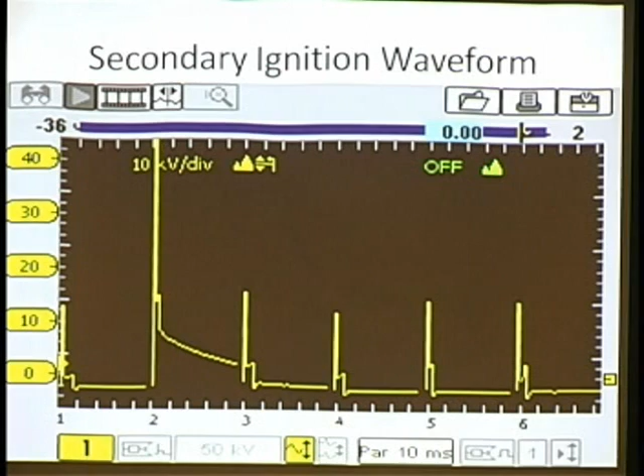Does anybody have a MODIS, anybody have a Vantage Pro? Do you have the secondary, the SAI 2000 kit, that piece of junk kit that everybody complains about? Okay, it is a pain, that doesn't give a very good pattern. But watch what I'm going to do with that kit, and I'll show you. Once you understand what I'm showing you, you can take that kit to a different level right now. And by the way, if you don't have it, you can probably get one for next to nothing from somebody because they can't stand it since it, quote unquote, shows a lousy pattern. Watch what I'm going to do with that kit.

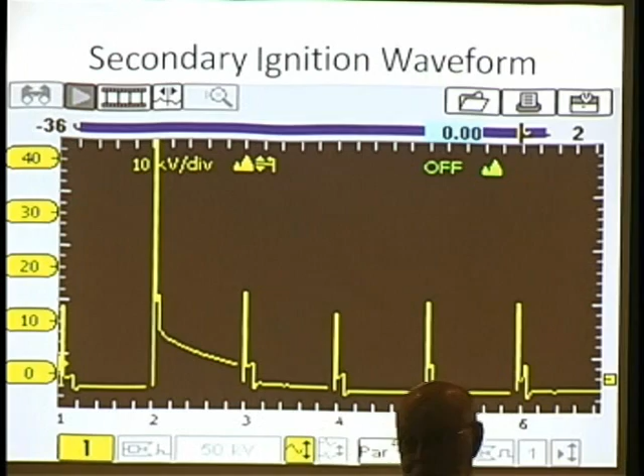Okay, what did I do? I did it, I'm good at this stuff by the way. I can fix them, I can mess them up too. I'm really good at doing both. What did I do here with 2 cylinders?

I'm trying to show everybody that there is no problem whatsoever on those two cylinders in the combustion chamber. What I've got jumping out here - look at the four of them, then look at the two. What I did was take the inline spark testers. I have an adjustable one, and isn't that external? Isn't that a resistance? What I'm doing is adding resistance outside the combustion chamber.

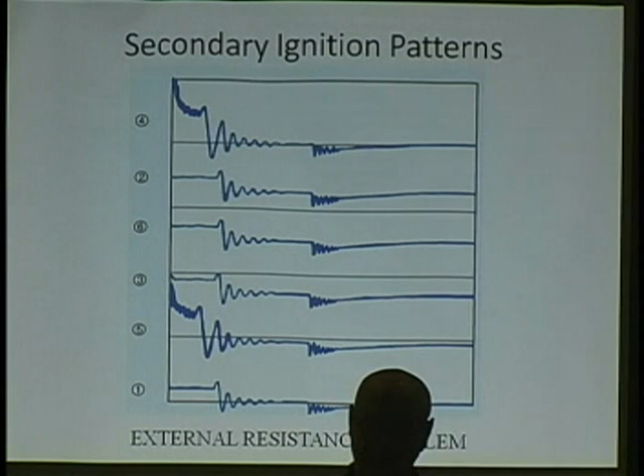That's sticking out like a sore thumb right there. I can't see the firing kV because I'm in a raster pattern, and raster is good for looking at timing things but lousy for looking at voltage things. I don't need to look at the firing kV right now - it's sticking out like a sore thumb in that burn time. The two are completely different than the other four.

A lot of times you get these carbon tracks. Remember, electricity is lazy. Now, would that be a problem internal or external to the combustion chamber?

Listen to me very carefully - people don't even think about this. Your car, forget about your customer's car - your car, if you have spark plug wires on your vehicle, do you have short or long boots? Most people don't know, and most people think it really doesn't matter. It makes a big difference, because from the factory, believe me, they put a lot of time into this. Because electricity is lazy, if you put a short boot in there, there's a big difference on the ceramic, the porcelain, for getting down to the metal.

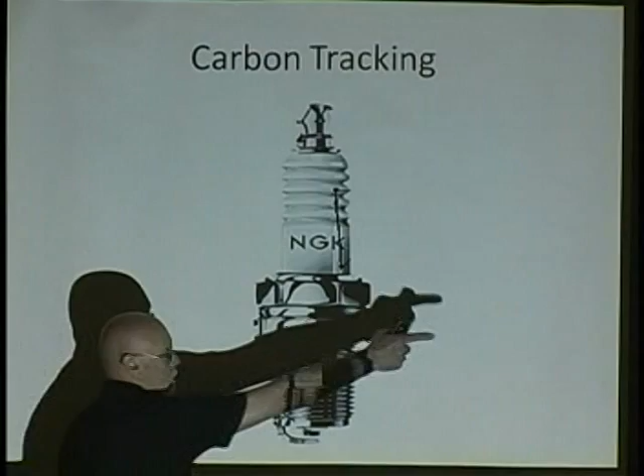Isn't the end result what's going to happen to the plug normally? It's going to fire down here, and it's going to go back up here and go off into the head. So this is the end result anyway. The electricity is saying, hey guys, instead of going through that compression and that resistor plug, come right down the side here.

I can't begin to tell you how many times somebody comes in on a misfire in a vehicle. When did it happen? I do an eight-hour course on interviewing customers. Nobody in this room can handle 22 to 28 problem cars a day, every day, with a three-week wait, without positively having a really good way of interviewing people. Those people know more about the problem than you do. Don't let them walk away. Interview the customer, interview the customer.

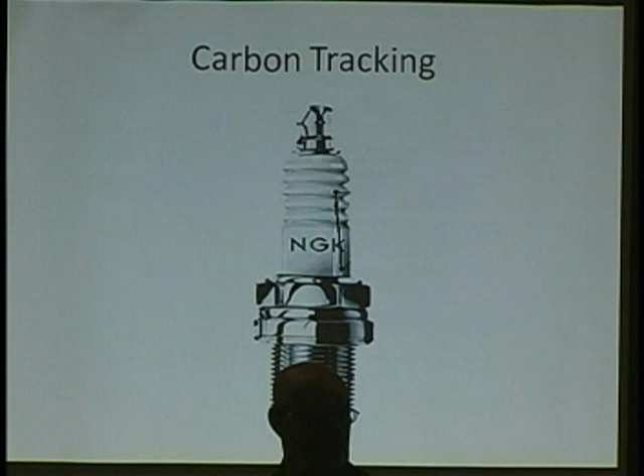You know what I get all the time with something like this? The problem started two weeks ago. What happened two weeks ago? What have you done? Nothing. And then all of a sudden I start looking at the car, visual inspection, and it looks like the alignment adjustments were off. Oh yeah, well I had alignment about two weeks ago, just about when it started, right?

Well, how about if somebody's doing alignment and for whatever reason the guard on the front wheel well has not been replaced - not that any technician would ever not put everything back. Now all of a sudden, when it rains and you turn the wheel, all the water comes in and hits the porcelain. That was a problem with Cadillacs for years and years. Now what happens is electricity is lazy, the water's a conductor, and it goes right down. So it's intermittent - no, it's not intermittent, it happens every time it's wet.

Now the other car manufacturer might put a long boot on it. That way they've got a lot less chance of having that problem. What's the problem with a long boot though? Now you're almost like a guided path down to that metal. So some manufacturers don't like the long boots, some don't like the short boots - but electricity is lazy.

Now this is a big problem right now - coil on plugs. Every time you pull a coil on plug out, look at them, I'm telling you. About halfway down, look, and you can see the marks there - I see lightning strikes. Because when that goes down, that coil on plug is going into that hole, and there's metal there.

If that system's running lean and it's got ethanol fuel in it, it's two in the afternoon, and you're taking that firing kV up to 30, 32, 34,000 - I'm seeing it on a regular basis right now. And guess what, 30,000 volts can damn near go any place it wants to go. Most coil on plugs, if you look at them very closely, in the middle is the mold where the two halves are put together, and it's literally jumping out there.

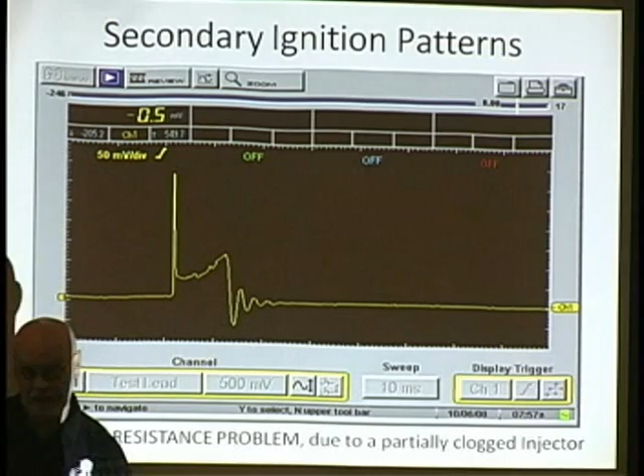Firing KV's going up, and then coming out basically - if I hide this right here, man, you can't get much better than that, okay? But the firing KV's up, right? But where I have the spark KV, it's the same as the other ones. That's the cool part about it. If the firing KV is high, but the spark KV is the same as the other cylinders, it's not external combustion chamber - it's inside the combustion chamber.

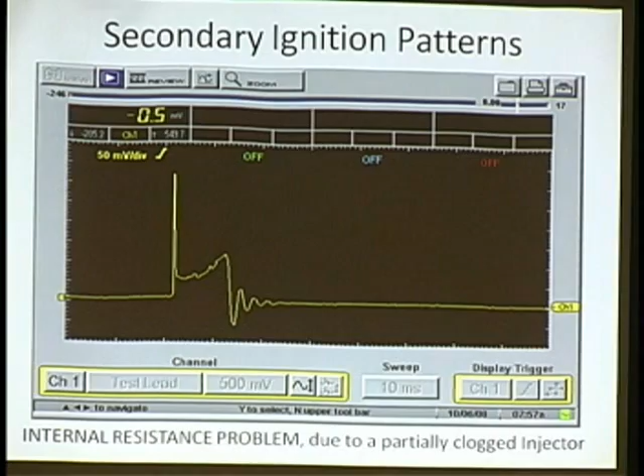There's a partially restricted injector right there. And by the way, that is that one I showed you, the burnt exhaust valve. After we took care of everything, that was the partially clogged injector that would cause that problem right there. Okay, now here's - actually I saw one of the scopes they have over here, the PDA.

PDA, that's the scope area, the Master Tech one. I don't care what you want to use, I don't care, right? But look here - everybody across the room can actually see there's something going on there.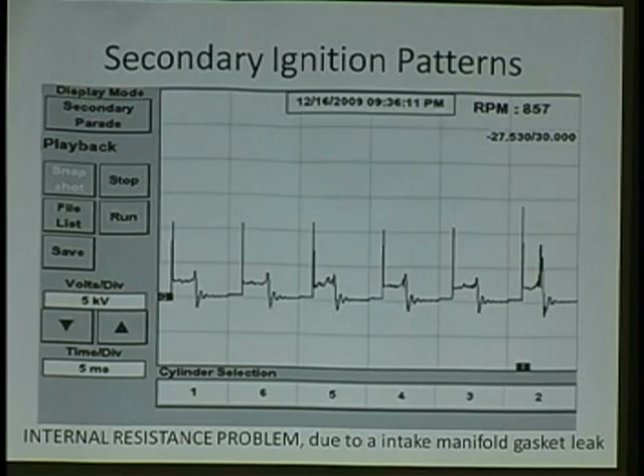And what is it? This is the same - Spark KV, Spark KV, Spark KV, they're all about the same. But look at that there. This is absolutely positive - and again, you've got some type of problem that's causing it to run too lean. It's an intake thing. So when I say internal vs external combustion chamber, you've got to watch how you do that. Because this vacuum leak - what I mean by that is it's not high resistance electronically outside with a wire or the plug or something like that. This is causing an internal problem because that cylinder right there, that leak, is going to cause a lean condition in the combustion chamber. Make sense?

Right? This is one now also - this is a big problem now. Go ahead, just one question before you follow up. Carbon tracking - will that get rid of it if it's carbon tracking prior to the cylinder?

Will it have no oscillation? Yeah, and we'll go into that.

I have been seeing this the last 2 to 3 years, and I am sick of this, to be honest with you. I am seeing so much of this, it's unbelievable. And what you got to know is that one of the things that got the automotive manufacturers in a lot of trouble, what almost put them out, is they did too much monkeying with their money, too much research and development independently. Let somebody else do it, right? Like a company like Delphi. Delphi, if you don't know, does tons and tons of research, and basically, I always joke, they got like a supermarket. So if you want a fancy intake manifold, go to Delphi and go down aisle 4 and see what kind of intake manifolds they have.

Delphi makes about 85% of all the flex fuel sensors. That is Delphi's sensor right there. And what these things do is they tell the alcohol content as the fuel is going up to the engine. Now, most of the new cars today don't do that anymore. Now they're using the O2 sensor, and the fact that they see the fuel went up - basically what happens at that point, the car's got to run a little bit bad for a while before it sees it.

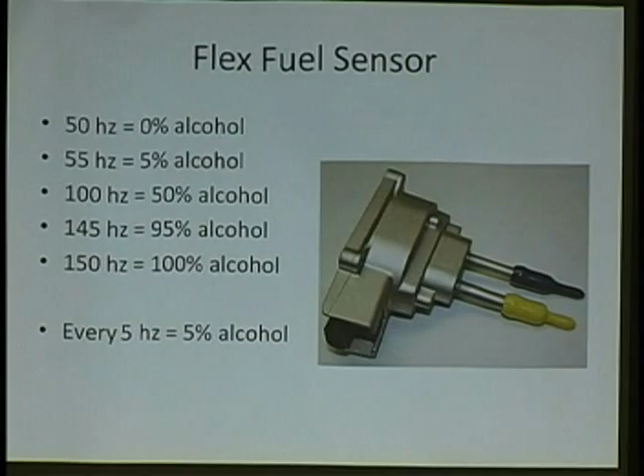What's the computer think now? It's E10. It pulls the pulse width way back and starts it up. The sun comes out, the birds sing, everything's beautiful again, because now it's listening to the truth. I'm telling you, there's so many jobs like that. The computer's not at fault - it's doing what it's told to do. Simple, right? Here we go.

Love this one. I don't know how many people get involved with current ramp of injectors. Now everybody, if you don't understand what you're looking at - again, I don't look at voltage over time. Okay? Everybody says the same thing.

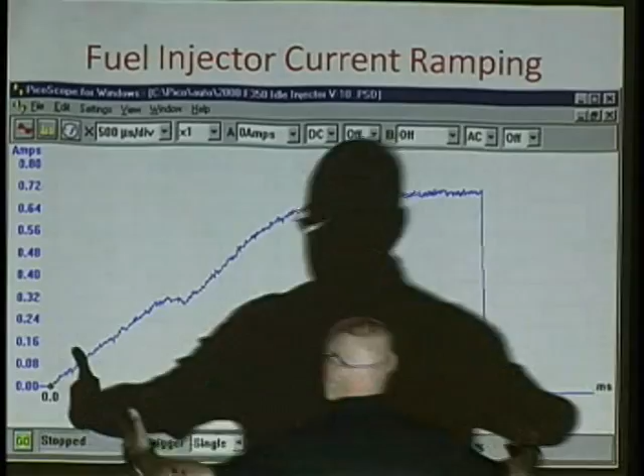If I put up a picture of voltage over time of an injector, you see it pulled down, and you say, what is this area here? That's the pulse width of the injector. Okay, give me the definition of that. Oh, that's when it's operating and dumping fuel. No, it's not. This is the pulse width of the injector right here - from here to here is the pulse width on this vehicle, 4.0 milliseconds.

That right there, that's when the pintle moves. So from here to here - there's a big argument out there about whether any fuel is actually coming back. I really don't care, even if a little fuel is coming out I'm not going to lose sleep over it. Basically, the pintle did move to right there.

Visualize that I take somebody and push them, right? I take Rich, I push Rich, and I push him, and I push him. The 4th time I push him, he moves backwards. If I'm pushing, isn't it easier for me if he's moving backwards? What's happening is you're building current, building current, building current, and you finally build enough current that the pintle finally moves. That's the dimple there - that's why the dimple's there, because it's actually moving.

Has anybody ever seen an adjustable fuel pressure regulator? If you adjust the pressure, you get richer, and this and that, right? There's two things that move a pintle: one is the strength of the magnetic field, which I just described. The other is when the fuel comes in, it goes down and hits a cone, causing a reaction, a vortex, that helps pull it. So if you didn't change the resistance of the injector but raise the fuel pressure by 5 psi, it's going to fly open.

Okay, let's talk about setting the lift wrong, and pinching off the return lines, driving the fuel pressure 2 times higher than it should go. That's what happens with this stuff. Now, this is about ignition waveforms, but do you see the point I'm showing you right now? It doesn't stay in ignition.

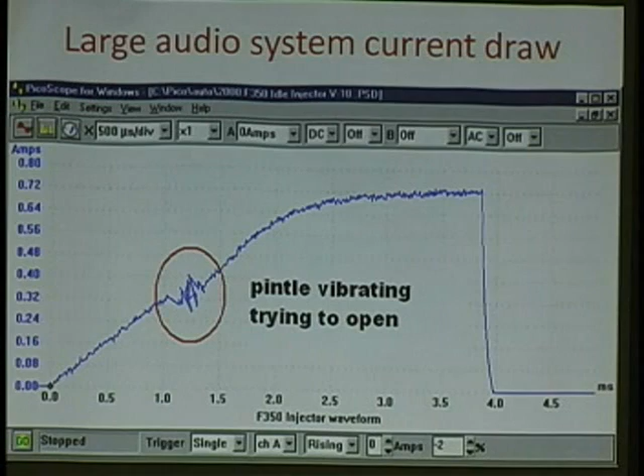Makes sense now? So you've got to investigate. Either you really look at the problem or you look at the result of the problem, right? Carbon.

Here's what I love, it's kind of weird. I could talk about carbon and then run right back. We've got to get that stuff clean. Do you realize very simply what's going to happen, especially in the morning? Everybody in this room has heard a customer say start, stall, start, stall, start, stall, start, kind of run a little more, start, run a little bit, and then it seems to be okay.

You know how many times I've gone away to a seminar, I've stopped and got a couple little charcoal briquettes and took them to class, because no one's ever seen them anymore, they've all got propane barbecue grills now. I take the briquette and smash it, and if I put water in there, what happens in no time? It's gone, right? Well, we never seem to get that.

So what I told them, I said, I went into class one day, and I said, well, usually my students have all eight categories already. They've had engine performance for 8 weeks, and then I teach a separate class called advanced engine performance. The problems I worked on the day before is basically what we talk about. I said, oh God, wait, we're going to see today, man.

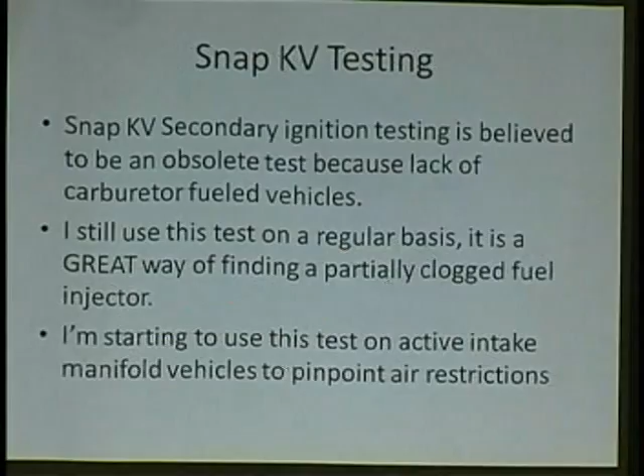I had a car yesterday, it was so cool, I thought. When I took the engine apart last night, just for you guys, you got to see this, man. You see what I took out of this car, man. It had... I'll find it now. There.

I said, look at this intake valve. Hey man, I said, when the injectors are shooting this thing, it's soaking up in that sponge. This is what was in the car like that. It wasn't in a car like that.

I went to my wife and I said, I need a favor. She said, what do you want? I said, next time you go to the dollar store, I need to go. She said, what? I said, you go to the dollar store and you always get the $49 worth of crap. I said, next time you go to the dollar store, you get me a sponge.

But everybody can realize now, what would happen if I take an injector and aim it at that? It's going to soak right up into it, right? What's going to happen to the ignition system now? At the time, it's harder anyway. You guys know how to get it running, right? It's running so lean right now, it's unbelievable. And even after it takes its belly full, it's still going to be running leaner than normal.

And you know what, it's like deer. If you got carbon there, it's not just there, it's all over the place, in the combustion chamber and everything else. The whole time that you're trying to fire that ignition with a carbon buildup, number one, what's it doing to compression? Right? It's raising compression, right?

And then what's it doing to the air-fuel ratio? It's making it leaner, right? What are the two things that make it harder? You got both of them now.

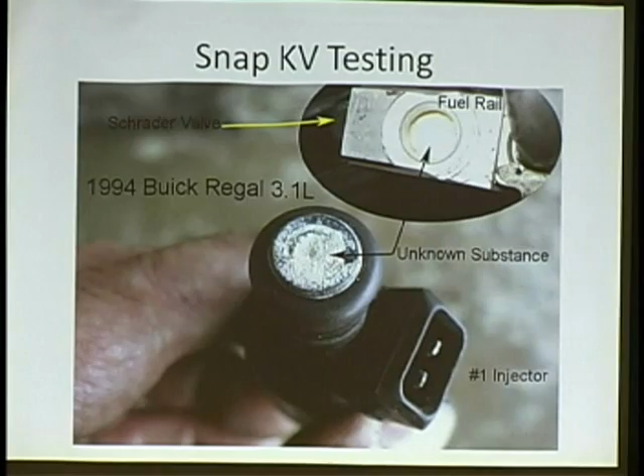All right, here's what I want to do now. This is how we're going to wrap this up. Everybody remember me saying everybody says the SAI 2000 is a piece of crap? It is - you can hardly get a waveform at all out of it.

Listen to me very carefully. See up here, the pair of glasses? If you put an SAI 2000 on a Snap-on anything, don't try to look at a waveform - the waveform's terrible. Go up to the glasses and put it in text mode. And what happens now is it takes that lousy picture and does a great job putting it in text mode for you. If you listen to what I said this afternoon, look what happened here on this car.

This is the firing kV, this is the spark kV, and this is the burn time. Which one of these is the highest firing kV? That one, right? Which one happens to be the lowest over here? Okay, so we got a small problem on that cylinder, right?

Look at this, which one's the highest spark kV? So that problem - I'm asking everybody right now - is that internal or external combustion chamber? Absolutely positive. One time I said it's external combustion chamber - spark kV is higher, it means they jumped out earlier there, right? Without even looking at the waveform. But you got to hear what my point was: you have to know how it's supposed to work before you can use this thing.

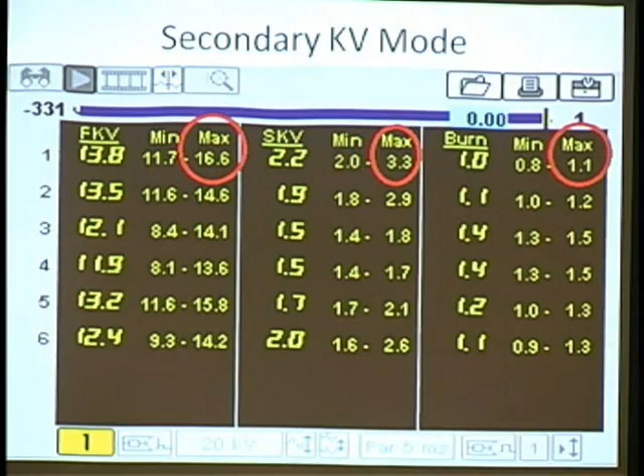Come up the rest of the story right there. Look, this gives a min-max. Look at the rest of the story there. That's a dead giveaway - look at this one, how high this is, and look how low this is here. All right, 0.8, that's the lowest one, that's the highest one. Look at this here - absolutely positive, 1000%, that's a problem right there. I know I did it, but I'm proving it to show how this can actually work for you, right?

Again, what are you looking at there? Look at the burn time. Look at this one right here. Look at that. Now, could that be external or internal? Like I was saying to you earlier - here's the thing, you really can't tell because you need to see the whole waveform. But if I bring it over to this text mode, as soon as I look at that, right now you don't know - you don't know if it's internal or external combustion chamber right now, because all I know is here's what I got. But now I got to find out what the spark kV is, though, right?

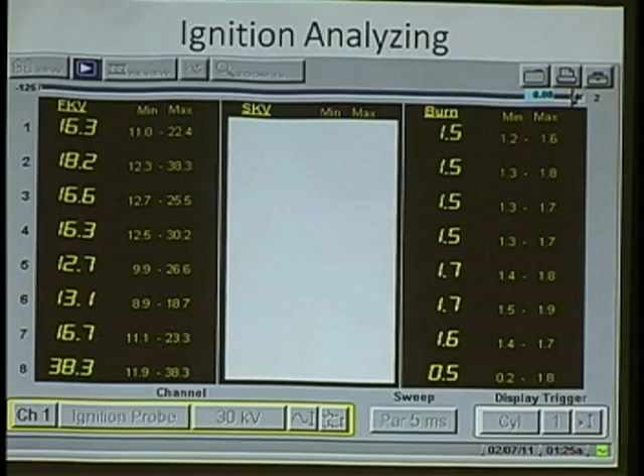Is there any even hesitancy here? You know exactly what it is just by looking at that, right? And again, I did it. All right? I'm good at it. I can do this. I learn from my students how to mess them up, right? All right, so my point is, look at that. Look at the spark KV.

That's the picture I showed you earlier that really jumped out, and I said I did. There it is, right there. Very, very simple thing, with the high spark KV external, yeah, external combustion chamber, because it would have jumped out early, right? Now here you go, actually that's this scope right here, there.

Now here's one of those ones I said, look, you got one here. You have all kinds of issues going on here. But if I ask you, let's really spend some time, right? We definitely have a major problem here. This is a clogged injector right here, all right, no doubt about it. This is running really lean, okay?

Yeah, well that's a good point. I'll tell you why, and that's a tough one. I love everybody says, oh it should be nice and level. I want to see it go up a little bit, okay? So I'm going to tell you, even straight is slightly rich.

Very rarely, but if you're right, what I do sometimes, I'll bleed propane into the vehicle, and you can see it start to tilt down. It won't go too much further down. Once you get too rich, it's going to really start falling on its face.

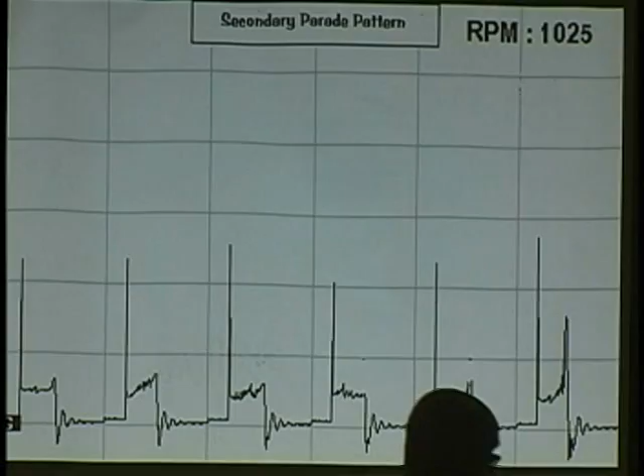They always have vacuum leaks in them. Now this is the last one I want to show you, all right, look at this. Everybody knows about the thing called a Ford multi-strike? It hits it a second time, okay, it fires once and fires again. It only does it up to about 1,400 RPM though, because it doesn't have time to do it, and doesn't have to do it, by the way. Under 1,400 RPM is ugly, okay. So they hit it a second time to clean it up, okay?

Here's what I want to show you. This is the cool part about it if you really get into the milliamp reading, right? Look at this here, this is a 6-cylinder engine, so every third one of these is the same coil pack. Everybody take notice of something? The second one is short here, then two regular, short, two regular, right?

The second one is not moving the car in a forward direction at all. I call it an EPA brownie point, clean the cylinder up a little bit. But what can I tell this customer though? You got a coil that's going bad, you got a coil that's going weak.

If I didn't see this second one, this one right here, these are all about the same, so the car's running fine. But I say right now, if this were an airplane, I wouldn't be flying it.

Yeah, now I've been accused a lot of times of messing people's cars up, because I can look at something and say, you know what, it's running good right now, but you got the beginning of a problem. So it's almost like, okay, my car was fine, and then two weeks ago you told me it was going to break down, now it broke down. What did you do? It's because you know too much at that point. But everybody see that there? All right, that's why I say the power of a milliamp probe, looking at that thing is very, very, very cool and stuff.

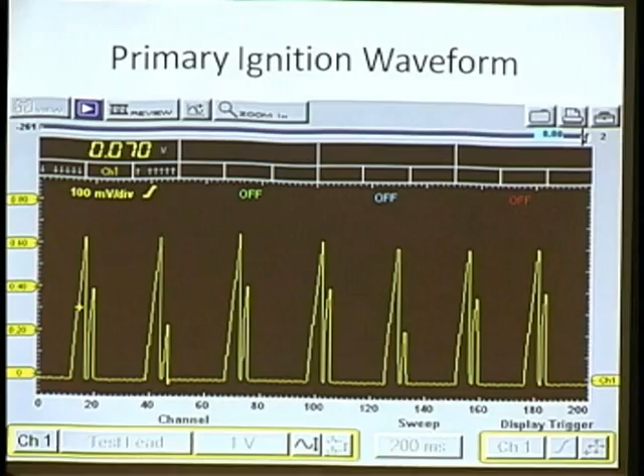Okay, another thing I want to do, and Jared, can I have 2 seconds here? All right, this is a 4-cylinder, this is a 4-cylinder Mitsubishi Eclipse. Everybody hear about watching the tools you're using today, loading a circuit. If I had the time right now, I'd be asking everybody, describe loading a circuit to me. Most people really don't know what that really means.

You use a test light, and it's low resistance, and you're going to bypass some of the current, and it can damage something. I don't have time now, so I'm going to give it to you right off the bat.

This is a 4-cylinder vehicle with a wholesale $918 computer that's been fried, because somebody put a test light on this thing to test the drivers in the PCM. See this coil right here? This is one with a ballast circuit, going up like that. See what I did? I marked it. You got 0.70 volts, 100 millivolts equals an amp, so that's 7 amps right there. This thing goes on and off, 7 amps, on off, on off, on off.

Two cylinders, I want you to grab the secondary wire. The other two cylinders, I'm going to grab the secondary wire now, okay? Because the other one, look at that very carefully. Here's 0 down here, all right, here's the other one. It's going 0.48, 480 millivolts to 710 millivolts. This thing is going on and off, the driver's going on and off, but it's fried. It's not releasing all the way, so what I'm building is a very weak magnetic field. You could just about see this spark on this other side here.

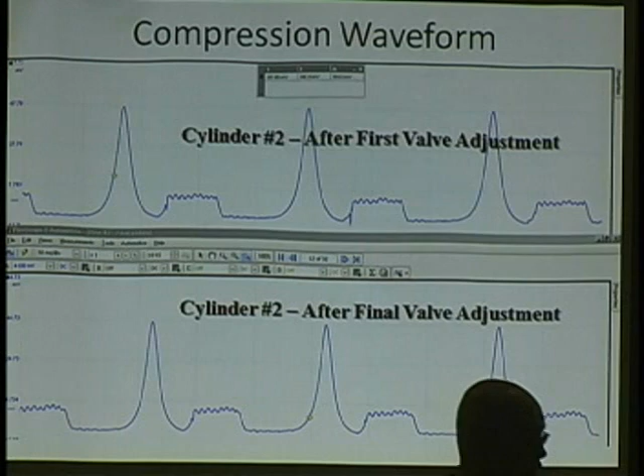That's not a valve adjustment. He said, yes it is, you saw the picture, right? See what it was before? And I said, yeah, I do see the picture, okay.

Well, let me tell you what that is. I said very simply, when you did your valve adjustment, what you did is you killed a cylinder, you put a lead down a transducer, and you took the secondary ignition wire and you grounded it, okay? You had the two leads too close to each other the first time. When you did your valve adjustment the next time, you had the lead further away.

He says, how did you know that? Because remember the bicycle pedals? When do you collapse that magnetic field in a coil? Before top dead center, right? See that compression peak right there? Where's the noise at? About 10 degrees before top dead center. So it had nothing to do with a valve adjustment.

It had to do with his placement of his two leads. So when you start jumping on a bandwagon and going deeper and deeper into new technology, which I do all the time, be careful. Be careful, you know what you're doing there, okay?